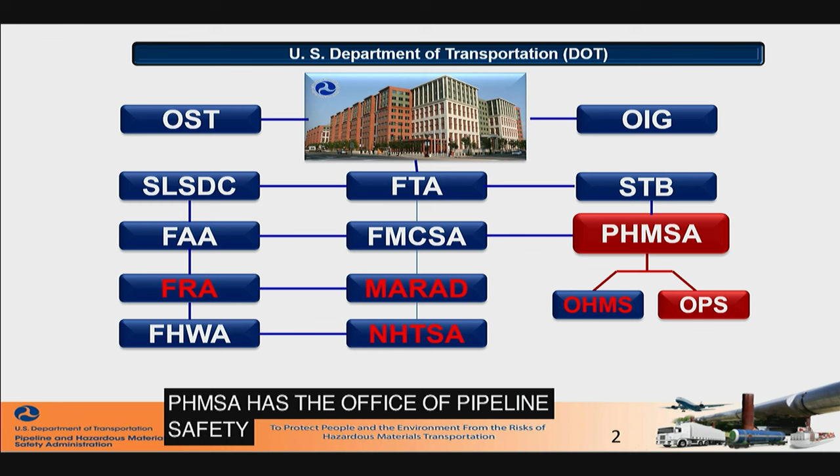PHMSA has two parts. We have the Office of Pipeline Safety, which I represent, and our staff here today represent, and then we also have the Office of Hazardous Materials Safety. Both of us have a connection with LNG, by the way, and we also have discussions and presentations from our Office of Hazardous Materials Safety over the course of this conference.

We have a new and retooled mission and vision statement. It's a modification of our prior mission statement, and also our vision as well. Our mission is to protect people and the environment by advancing the safe transportation of energy and other hazardous materials that are essential to our daily lives.

Our focus, I guess, is on advancing, which means we regulate, we implement policies, we enforce a variety of methods to advance safety. We promote safety. We are a safety organization. That is our focus—pipeline safety, and in this case, liquefied natural gas safety.

I think it's probably fitting to say, related to our vision, that we strive to be the most innovative transportation safety organization in the world. It's really something we target, and certainly with LNG, probably more so than many of the areas we deal with. We're doing a lot of work related to our pipeline regulations, but certainly with LNG, it's in pretty good need of advancing and being more innovative, moving beyond the 20th century more into the 21st century, and dealing with the issue of regulatory lag.

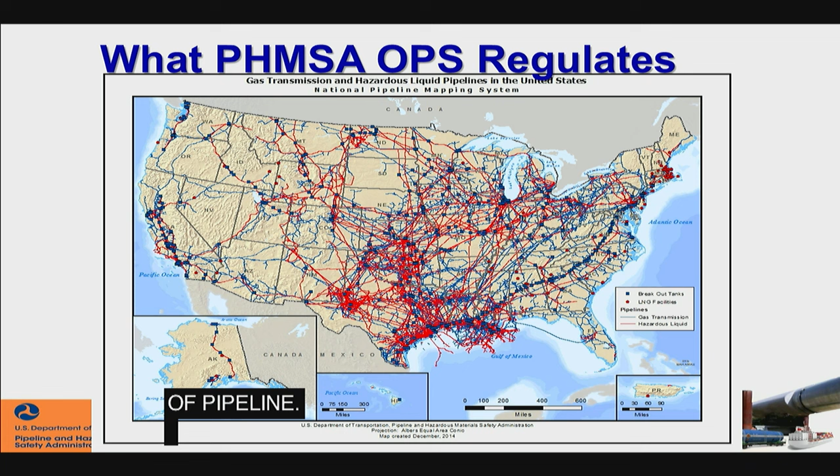An overview of the pipeline system. This only represents transmission and hazardous liquid systems. Liquid is red and transmission is blue. That's about 600,000 miles of the 2.6 million miles. The balance, about 2.1 million, is distribution pipelines.

Some of our responsibilities are kind of plain vanilla for many of you who deal with us day to day, but we do publish three regulations of note. There are others we also have, but Part 192 is well known as our gas pipeline safety regulations, Part 193 is the LNG regulations, and Part 195 is for hazardous liquid. We perform comprehensive inspections against these regulations, and then we monitor and enforce compliance. There are a number of tools at our disposal to do that.

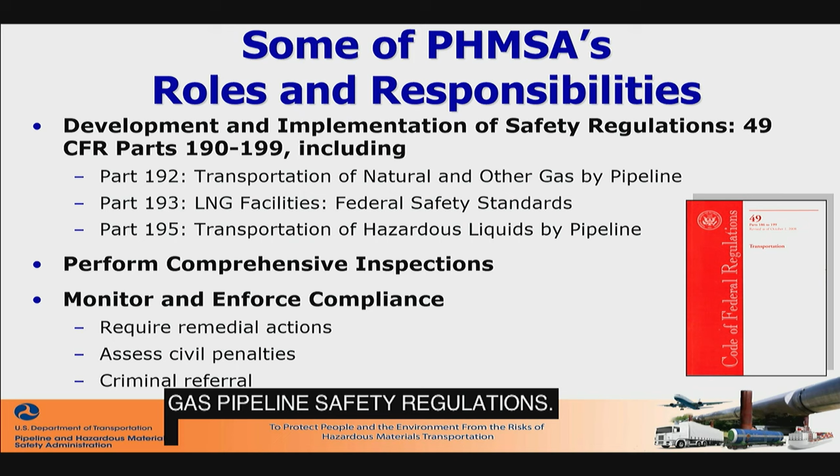We oversee the industry through our regional offices and about 150 and growing inspection staff nationwide that cover all 50 states and Puerto Rico.

Our underlying principle is that it's incumbent upon the operator, whether it's an LNG facility or a pipeline, to know and understand their system and know and understand the risks of operating the systems, the threats involved. We do establish the federal minimum standard for regulations, but we're not satisfied—complying with the regulations won't necessarily ensure safety all the time. In many cases, the operator may need to go beyond the minimum standards, so we strive to affect operator performance beyond the minimum standard. The focus is on performance.

In a nutshell, the operator needs to do what it takes to keep the tiger in the tank, so to speak.

As I was mentioning earlier, our focus here today and why we put these workshops on is to listen, to gather input, and to bring the greatest minds available to bear on technical topics. The focus is highly technical, and we do want to gather input that will help guide us as we move forward.

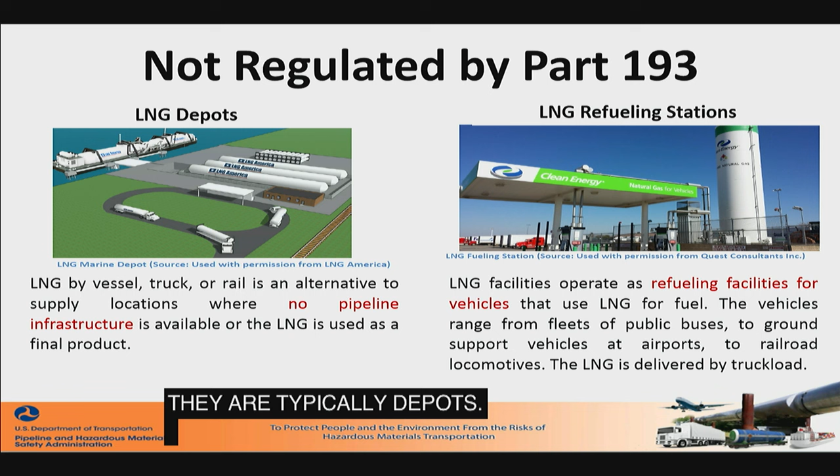Now, there's some facilities that are not regulated by us that handle LNG, and these typically are depots or facilities that receive their LNG by other than a pipeline that's regulated by us. It'd be typically a tanker truck, or it could be by a marine vessel. That's where the connection within our office with the hazardous material safety side of the house comes in, we connect with them who do deal with movement of product over the road for facilities such as the ones illustrated here.

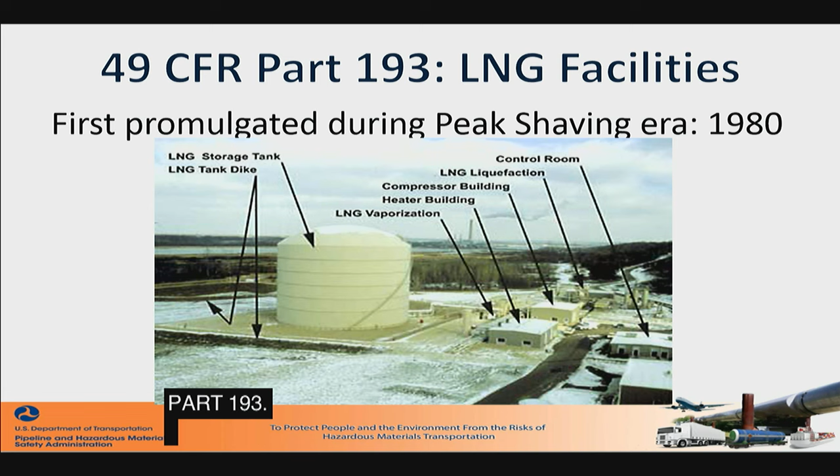As you know, LNG regulations were first promulgated back in 1980 for Part 193, and they typically applied to peak shaving plants where you had a very large tank, very large piece of property, and the various components identified here. We've moved beyond that from peak shaving to just a few years ago.

In fact, when I first came to PHMSA, import was the name of the game, and we were going like gangbusters to deal with import. And oh my, how that has changed in just a few short years. Now we're looking to export.

So we have these facilities that are in service, in the early stages of being in service, and then several proposed for export facilities. And now we're saying, as far as applications for all this vast resource we have of natural gas, small-scale facilities that aren't necessarily regulated by FERC. They're intrastate facilities, and those are on our radar as far as how do we develop regulations to apply to small-scale facilities, especially ones being proposed in industrial parks and the like, whereas the traditional design for an LNG plant involved large pieces of property.

We do coordinate with multiple agencies. Certainly, small-scale LNG presents an opportunity, a challenge for coordination among multiple stakeholders that are out there, and those are listed here. We work closely with the state and local related to the intrastate facilities and provide help and guidance to our state partners.

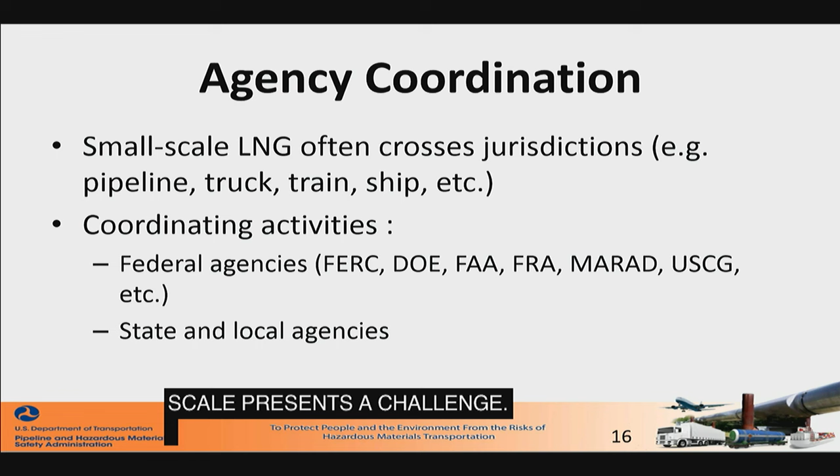As far as our overall plan, we'll flesh this out more over the next couple of days and in the Q&A. We have plans to update Part 193. One of the first steps was holding this meeting over the next two days, then going through the standards incorporated by reference. We need to consider new types of facilities including small scale, new technologies we can bring to bear, and look at incident history. Ultimately we will end up with a notice of proposed rulemaking that will update Part 193.

I would estimate that won't be this year. It could possibly be next year, but we need to take a careful, methodical approach to developing an update to the standard. That's sort of the general plan we have.

I would add that we also have a plan to update the incorporation by reference, the standards that we reference in Part 193, and that will probably be a separate rulemaking before we do the general overhaul of 193.

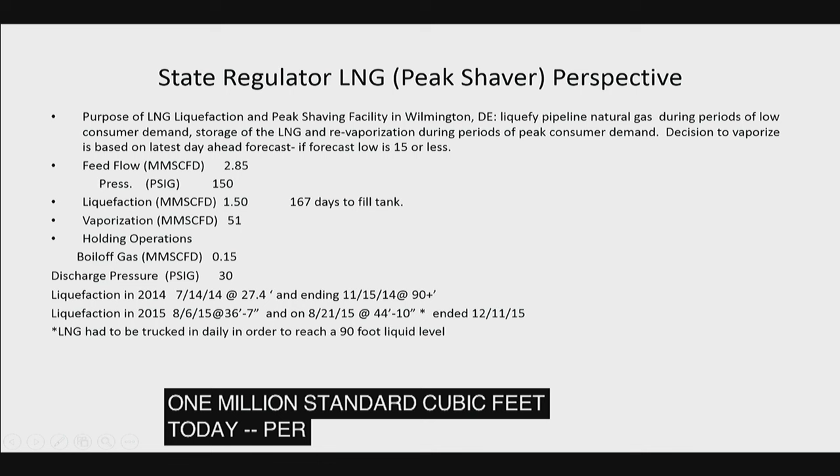Generally, it takes most of the summer to fill the tank. In 2014, in July, it started out at 27 feet, and by the end of the period of liquefaction was up to 90 feet. In 2015, it started out at a tank level of about 36 feet and concluded at the end of the year, December 11th, at about 90 feet in the tank.

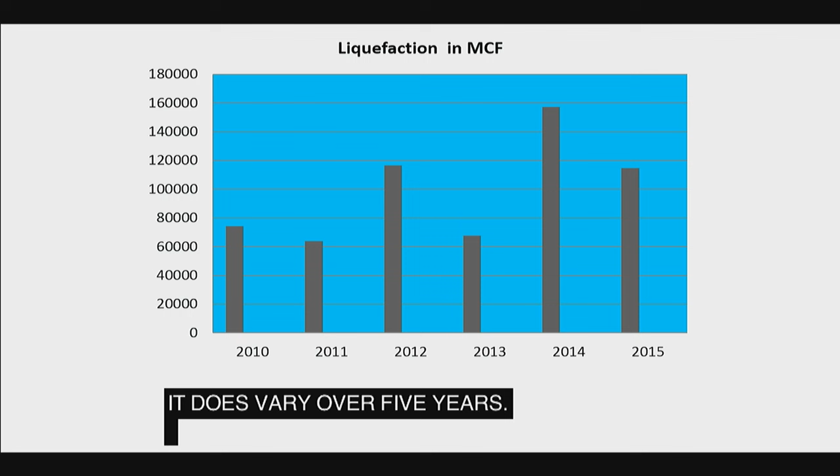The next slide indicates the liquefaction for the past 5 years. As you can see, it does vary over those 5 years, and I would say mostly because of the demand based on the weather in northern Delaware.

The next slide indicates the areas that I emphasize during my inspections as an inspector: inspection of the plant's operating procedures and maintenance plan, inspection of the plant's monthly preventative maintenance schedule to verify that the operator is scheduling the maintenance activities and maintaining a complete record for the plant, component preventative maintenance, inspection completion cards. Basically, a record is maintained for the maintenance items, identifying the component, the date, and type of maintenance activity.

Performed on the component, a liquefied natural gas liquefaction daily log, vaporization log, and daily plant operations checklist. I check all of the data that is recorded by the plant operators to ensure that the readings are normal, consistent, and within the proper operating range.

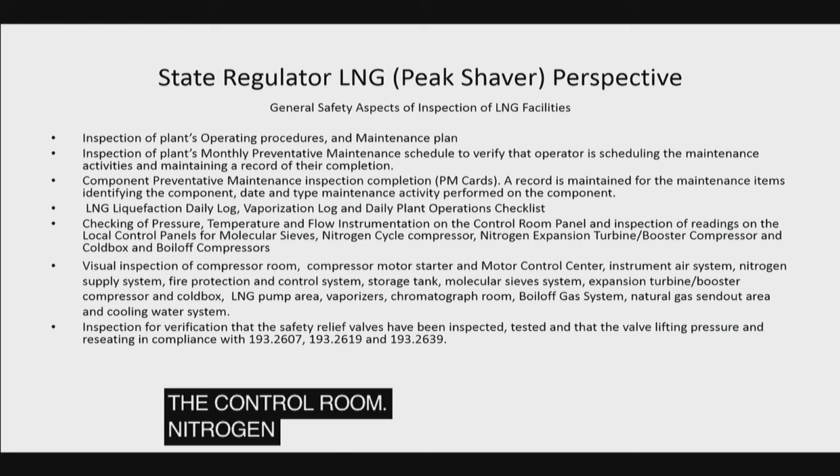Checking of pressure, temperature, flow instrumentation on the control room panel, and inspection of readings on the local control panels for the molecular sieves, nitrogen cycle compressor, which is a closed system, nitrogen expansion turbine, booster compressor, and the cold box and boil-off compressors. Visual inspection of the compressor room, compressor motor starter, and motor control center. Instrument air system, nitrogen supply system, fire protection and control system, and storage tank, molecular sieves, expansion turbine, booster compressor, and cold box.

Other areas include the send-out area and the cooling water system. In particular, I check the safety relief valves to make sure they've been inspected and tested, and that the valve lifting pressure is within the reseating compliance requirements of 193.2607, 193.2619, and 193.2639.

Basically, the liquefaction log lists components, the lines, valves, and instrument number, and a description for which temperatures, pressures, and flows are physically checked and recorded by the plant operators every 2 hours. Most of the time, the operator spends their time in the control room viewing all of the instrumentation.

Moving on to general plant safety prior to and after the startup of liquefaction: records review of the processes, vessels into which natural gas or other hydrocarbons are introduced must be purged with nitrogen to remove any air in the system — molecular sieves, cold box lines to storage — especially if open to the atmosphere. Purging is done by pressurizing with nitrogen and depressurizing through all available purge points until an oxygen content of less than 6% is obtained.

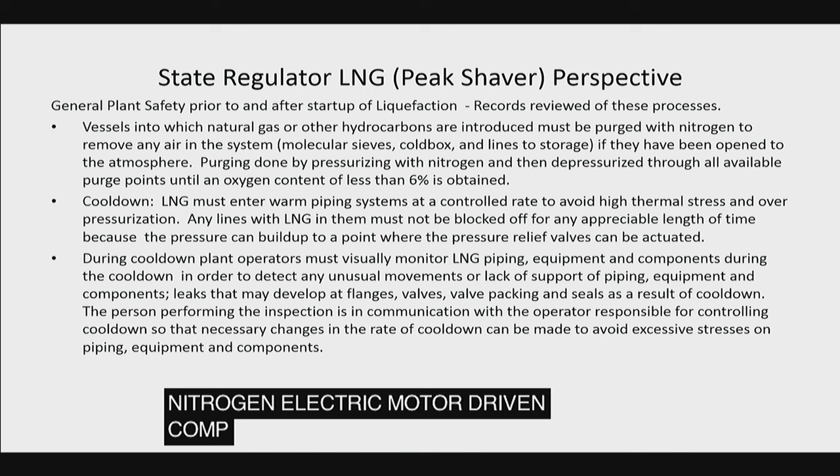Sensitivity adjustments were made to an auto transfer switch between two circuits, with a new switch installed on 12/16/09. The motor starter that drives a two-stage nitrogen electric motor-driven compressor was also replaced. Some equipment issues that had resulted in shutdowns included a broken compressor rotor bar, which was replaced in '09.

An outboard journal bearing replacement was performed that included dipping and baking of the motor stator windings. A thrust bearing collar had loosened, causing electric motor and gear unit vibration and shaking, requiring replacement of the thrust and journal bearings in June of 2010. The compressor had to be removed from the bed plate for a complete overhaul due to problems with seals.

This overhaul was done in March of 2015. There had been a helicoid score on the shaft, so repairs and replacement of worn components were made. That work was done by Houston Dynamics.

Regarding the expansion turbine, here are some of the dates involved with the expansion turbine booster compressor. In August of '13, axial thrust bearing issues were addressed. In July of 2014, the operator prepared to reinstall the turbo expander boost compressor. In March of '15, the expansion turbine and its housing were removed and the turbine sent out so the bearing housing could be drilled and tapped to accept new vibration probes for vibration detection.

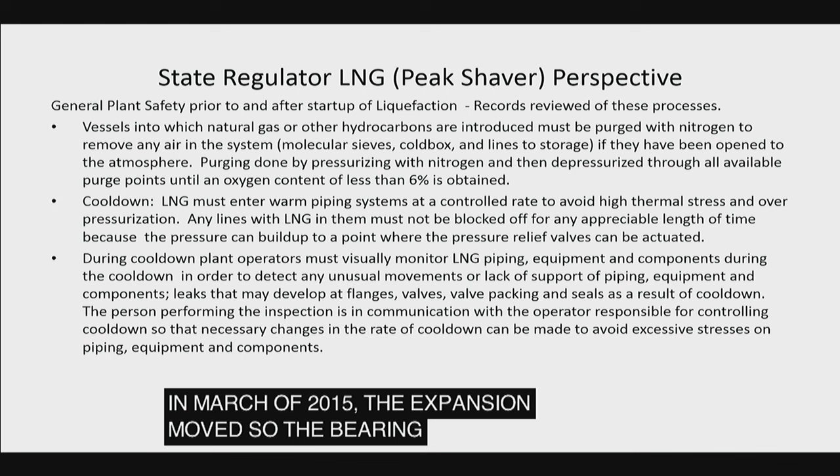The nitrogen expansion turbine needed to be disassembled, with the turbine and compressor wheels removed, and the shaft burnished in the area where the vibration probes view the shaft. In October of '15, a new Fisher booster compressor bypass anti-surge control valve was installed with a positioner, resulting in a 2-week shutdown.

Regarding the molecular sieve system, on various dates: on 5/25/11, there was an upgrade of the molecular sieve system, replacing the pneumatic valve actuators and solenoid valves. In the fourth quarter of 2012, the valves were replaced. Some machining had to be done afterward because of interference fits with some of the valves, and that was completed in July of '14.

As noted, there was a crack in the bottom of the molecular sieve adsorption vessel. The system was down for one week, from 10/24 through 10/30 of 2015.

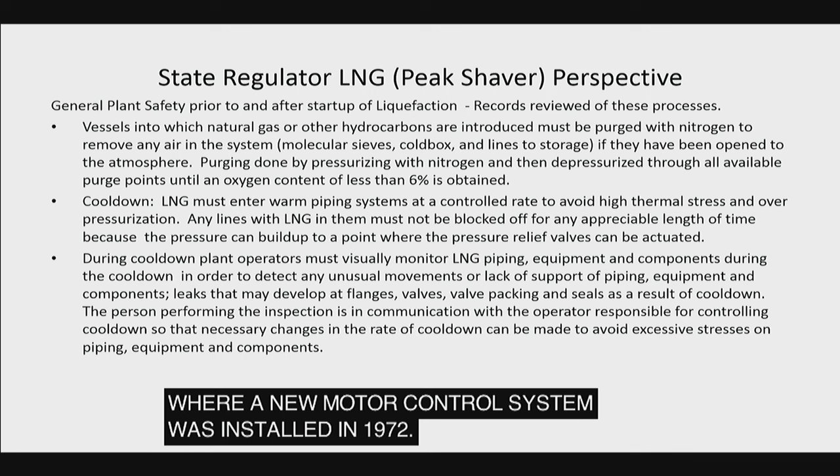Some of the new upgrades to the plant included a new Allen Bradley motor control center, replacing the original installed in 1972, and new local control panels for the molecular sieve system, the nitrogen expansion turbine, booster compressor and cold box, and the boil-off compressors. In addition, new temperature indicating and flow indicating measuring instrumentation replaced older instrumentation in the main control room panel.

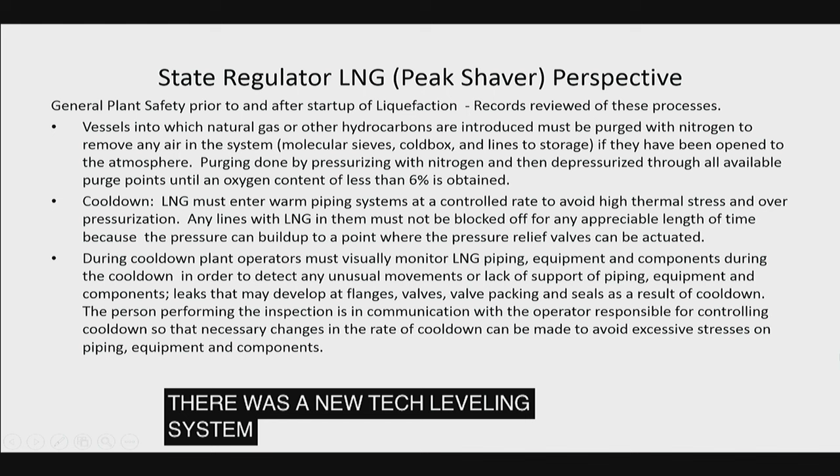They've added a new tank leveling system and Honeywell Enraf system, which can stop every several feet, descend to the bottom of the tank, and determine the density.

Other upgrades included a rebuild and overhaul of the boil-off compressor system to ensure more reliability, with new Dresser Rand controls and feedback sensors to measure temperatures and pressures at key critical compressor system locations. Secondly, the single-cell cooling tower was rebuilt and repaired, including replacing the honeycomb material and water curtain, replacing the cooling tower outer plates, and relocating the motor outside of the airflow stream to increase reliability and reduce corrosion.

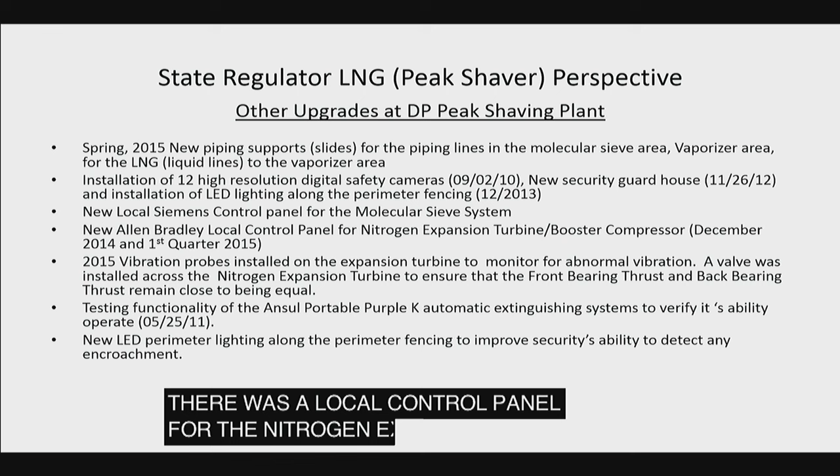Other upgrades to the plant included new piping supports, 12 new high-resolution digital safety cameras in 2010, a new guardhouse in '12, new Siemens control panels for the molecular sieve system, and the Allen Bradley local control panel for the nitrogen expansion turbine booster compressor. They also tested the functionality of the Ansul portable Purple K automatic extinguishing systems and installed new LED perimeter systems.

Original equipment Foxboro pressure control loop, transmitter, controller, positioner on each of two vaporizers was replaced with a Siemens digital controller, electronic pressure transmitter, and digital positioner.

Some remaining electrical issues, reliability due to external power issues has been improved, but the transformer upgrades do not rule out the possibility of electrical momentaries, surges, dips, overcurrent, undervoltage, and phase imbalance or lightning strike issues from a feeder substation which supplies the electric to the LNG facility of Delmarva.

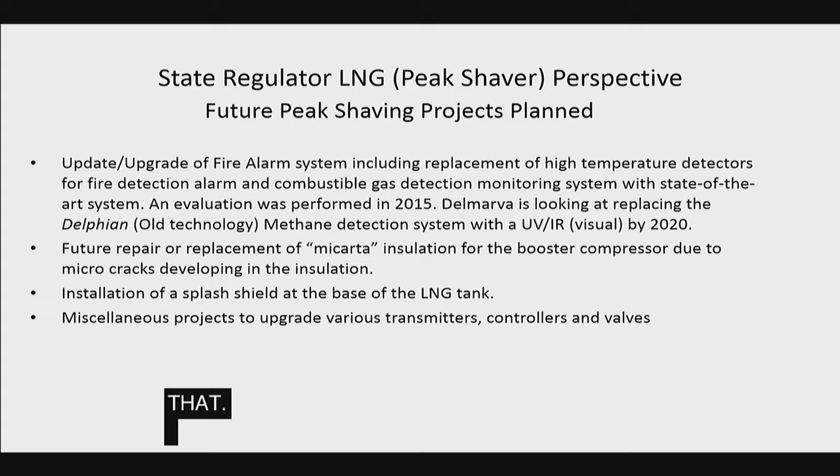They've had some problems with the insulation for the booster compressor, with some micro cracking, and they've got a backup in case of a failure. There's also installation of a splash shield at the base of the LNG tank, and miscellaneous projects to upgrade various transmitters, controllers, and valves. They've been very proactive at making investments in the plant to ensure its safety and reliability.

So they've definitely put a lot of emphasis into keeping the plant, trying to modernize it and also ensure its safety. Thank you. That's my perspective as the pipeline safety engineer in Delaware.

Thank you, Robert. It sounds like you got your hands full. Our next speaker is Jay Jablonski.

Jay Jablonski is Vice President and General Manager of HSB Professional Loss Control, the property group within Hartford Steam Boiler Inspection and Insurance Company. He has been involved with property loss control and fire protection engineering since 1980. He currently manages property loss control services for HSB, involving over 200 site surveys per month, both in the United States and overseas. Jay's experience includes project engineering with an international fire protection contractor where he specialized in the protection of LNG facilities, offshore platforms, and other energy-related facilities. He has been responsible for development of conceptual design philosophies, technical specifications for suppression and detection systems, hazardous analysis, and system application surveys. Jay has been a committee member of NFPA 59A, standard for the production, storage, and handling of liquefied natural gas since 1997, and has been committee chairman since 2006.

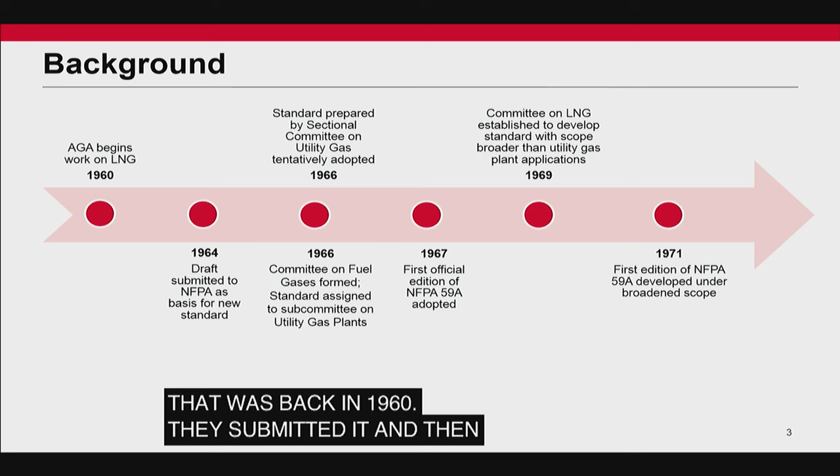As a background, the American Gas Association really started the project to get a standard in place for LNG. That was back in 1960. They put together a draft standard, submitted it to NFPA, and in 1967 the first official NFPA 59A was adopted. At that point, it was really based on protecting peak shavers. Things have changed since then, and we've actually broadened the scope of what we cover.

So what does 59A cover? It applies to facilities that liquefy natural gas. They handle it, they move it, they store it. They have training for people that run these places.

There's also a number of things it doesn't apply to. One you may see if you're in the industry is frozen ground containers - we don't cover that as part of our standard. We also don't cover portable storage, and probably one of the bigger things with what's going on in industry right now is vehicular LNG, whether it's automobiles, trucks, trains, or ships - that's not part of our standard.

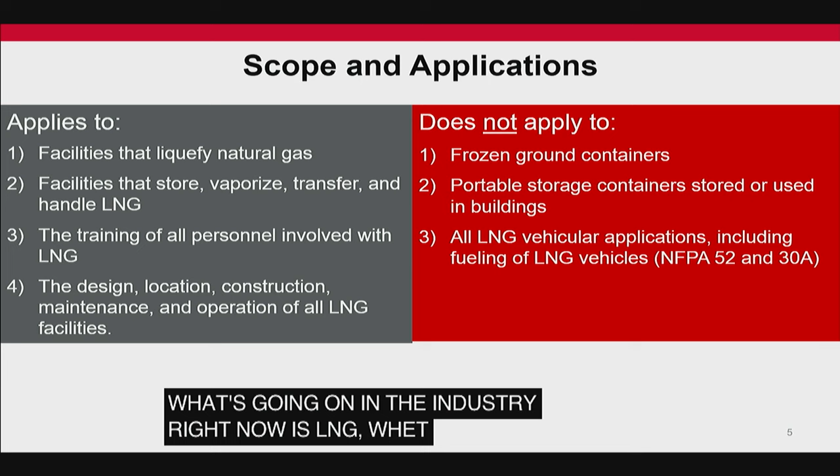Yeah, I know. Little feedback there.

So a lot of those folks are probably represented here in the audience today. We also have a balance rule in place so that you can't have one group basically run the committee. No more than 1/3 of our members can be from any one of those 9 groups.

There's also requirements for a consensus. So if we've got rules that are being changed, we require 2/3.

Oh, no, come on up. You got to talk directly into it. Okay, how's that? It was too far away. Huh? I thought it was too close.

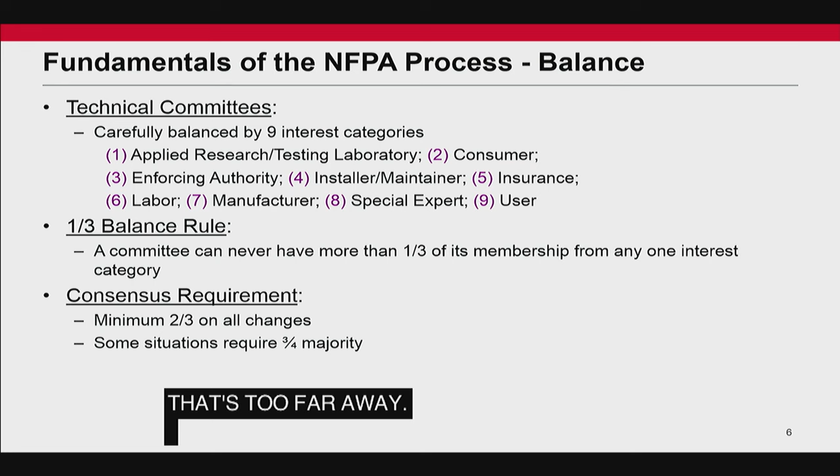So we've got a 2/3 requirement on changes in the rules. So again, we don't want one single group to dominate a committee.

Our current makeup is, as you see on the list, predominantly special experts. We've got 30% or 9, followed by users at 8. So those are our 2 biggest groups.

Ken had his PHMSA folks raise their hands. I think we've got a lot of NFPA 59A committee members here today, and if you could raise your hands just to show the audience our participation - so as you see, we could probably have a committee meeting, we've got enough members here today. But again, we look for people who are experts in the industry, who want to be involved and can bring some expertise to our group.

We also have alternates on the committee who, if the principal member can't attend or is unable to vote, we have alternates to do that. So about half of our principal members have alternate members that support us also, and they might bring some special expertise to the group.

So I want to go quickly over the changes since 2001, because that was the edition that was adopted by Part 193, and I'm going to hit it at a high level. If you went through and looked at all the changes, we could be here for 2 days. I've got a document of 190 something pages long to do a comparison between those 2 editions. So there's a significant amount of changes.

So we've reorganized the chapters. There's been changes to reference publications. There's been a lot of changes with tanks in terms of what was covered, what wasn't covered. I'll go into each one separately.

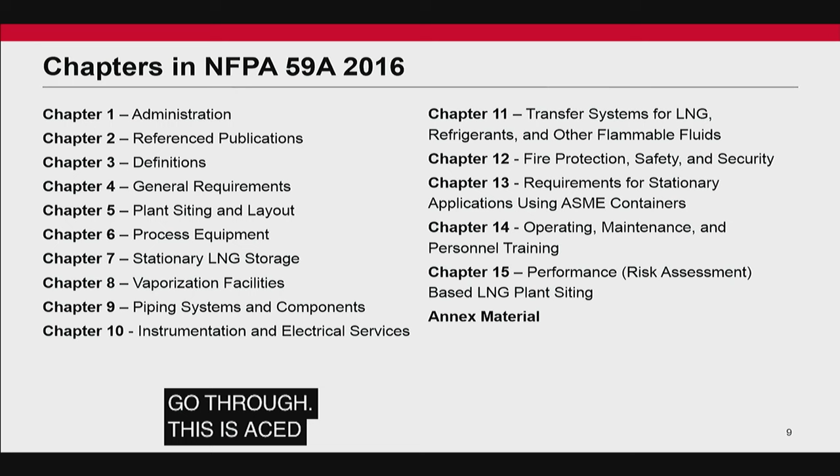The rest I'll quickly go through. B is for seismic design. C is for security, which is based on the 49 CFR 193 subpart J, Appendix J - we've actually incorporated that in there. We've got a section on training, D, and then there's informational references, Annex E.

So chapter 2. Again, I'm just going to hit some of the highlights and not hit every chapter.

This is the reference documents, the documents that, as part of the standard, are incorporated by reference. We go through this every cycle, about a 3-year period, and decide which standards, and which version of the standard, are going to be referenced. One good example: in the 2001 edition, we referenced the 1992 Boiler Pressure Vessel Code. In the current edition, the 2016, we adopted the 2013 Pressure Vessel Code. The standards we adopt have changed quite a bit over the years, and we try to stay current. It's a big project as a committee, but something we feel is necessary.

So we typically have a task group that goes through the list and says, here's where we are on the current standard, what's changed, what are the new standards, and does it make sense to adopt whatever the next version is.

One of the changes is in the definition section, Chapter 3. We defined a component, a facility, and a plant. There's been confusion over the years in the use of facility and plant, so we tried to define it better: a component is a piece of equipment within a facility; a facility is something that actually handles and makes the LNG, vaporizes, stores it, whatever; and a plant could be multiple facilities within one location functioning as a unit. Again, trying to standardize this so it's understandable to industry.

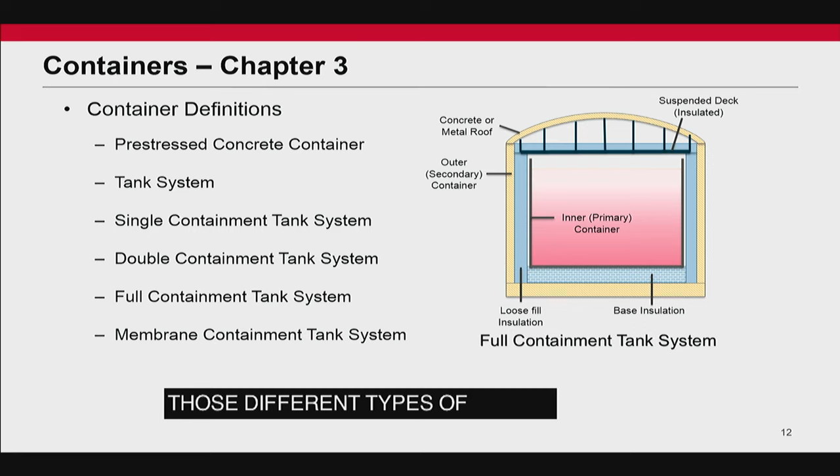Probably one of the bigger changes, until I get to the end, is plant siting and layout, Chapter 5. This is near and dear to most of the folks involved in the LNG industry. We've had a lot of changes in terms of siting of equipment and facilities, distances to property lines, and distances to different occupancies.

We added a model evaluation protocol for vapor dispersion. The 2001 edition specified a very specific method to use for vapor dispersion analysis. Now we have an evaluation protocol that allows other software and methods to be used instead of just that one specific one. We've also added differences in spacing, on thermal spacing, allowing some credit for active and passive systems. Again, a big change.

The siting criteria from a spill design has changed over the years, mainly based on the type of tankage that's in place. So big changes there.

We've also gone to a number of different classifications for buildings in terms of seismic, wind, ice, and snow. We've classified them as A, B, C, and you can look it up in the standard. I'm not going to go through the details, but again, changes on how you design these buildings.

We've put in some additional requirements for portable LNG, which really wasn't much addressed back in 2001. And now there's more emphasis on concrete design, so we've added a reference to the American Concrete Institute.

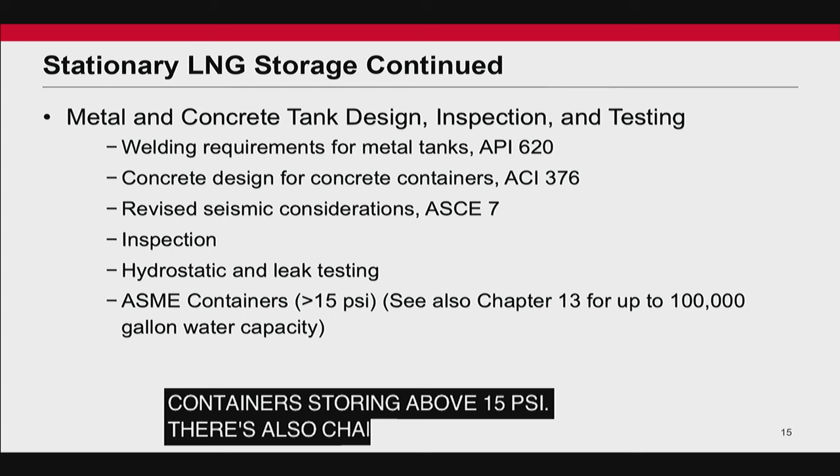Piping system and components, which is now Chapter 9. Same thing, we talked about what the requirements are for piping.

There's a definition of process piping, which sometimes brings up an issue with what is piping within a facility. We reference ASME B31.3 process piping, and that is for piping that is not part of the LNG container. There's a separate requirement for piping that's part of that container. So again, some changes there.

We define the materials of construction for the piping, what the requirements are in terms of suitability for its use, whether it's for cryogenic LNG process or whether it's for, say, ambient temperature type processing. So again, we look at those requirements, decide what standards need to be followed, and typically adopt those standards and maybe add additional requirements beyond it.

We've got inspection testing requirements for the piping systems. And then we also addressed, which is again relatively new, the cryogenic pipe-in-a-pipe systems. I know one of my speakers following will talk a little bit more about that, so I just wanted to at least throw that out there, that again, this is something that's been changed since that edition.

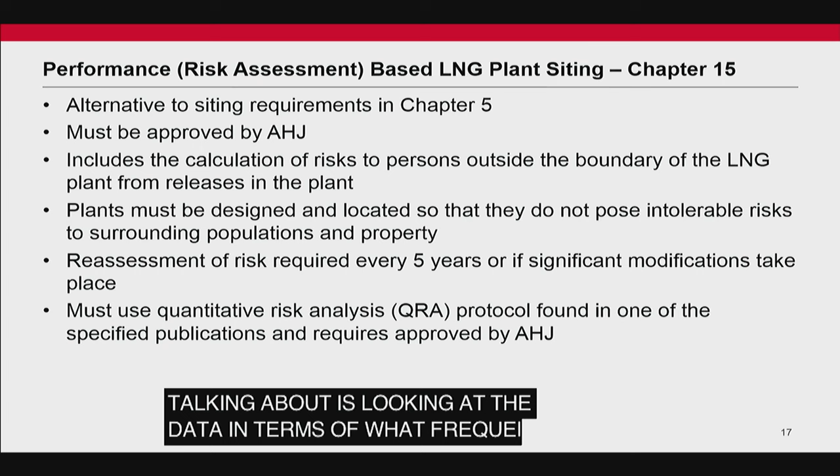I know one of the things we talk about is looking at the data in terms of what frequency should we use for failures. There's information out there, and there's new information being generated, and as a committee we always look at that and say, are there things we can do to improve, make it better, add additional information, make for, again, a safer facility.

Next, I want to touch on PHMSA's adoption of the newer editions. And again, this is from my perspective, not from PHMSA's. We'll hear a little bit more about that later on.

But the plan is to review the current edition of NFPA 59A. They have really three options. They can adopt it in its entirety. They can adopt certain sections of it, kind of a cafeteria style, I guess is the way to put it. Maybe they feel Chapter 5 is appropriate and Chapter 15 is not. Again, that's the decision they have to make. Or they don't adopt it at all. They leave it as currently 193 adopts the 2001 edition.

So ideally, the goal would be to get to the point for the next edition, which is the 2019 edition, that there's agreement between the committee, the users, all the participants, that the 2019 edition could be adopted in its entirety. Again, it takes time to adopt a standard. It takes time to change rules and regulations within the federal government. But I think we're making some good steps forward, some good discussions. We've had a couple meetings where we've talked about some of the points that I'm going to bring up next.

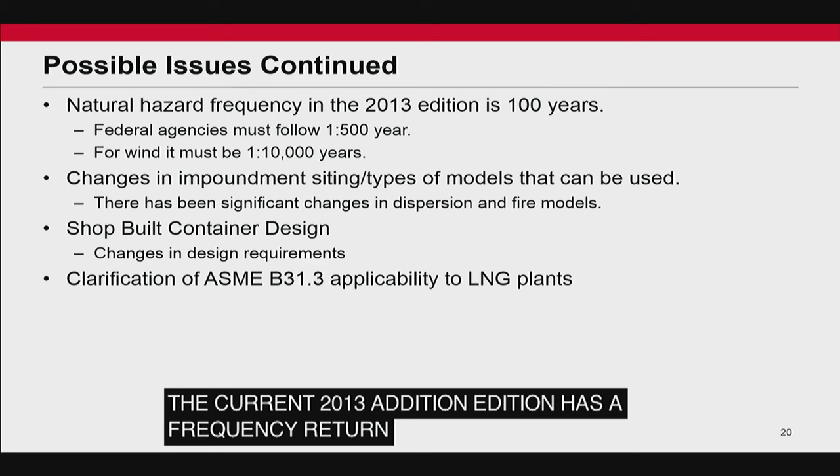Another issue is the natural hazard frequency. The current 2013 edition used a 100-year natural hazard frequency return period. The federal agencies have different requirements for that. So there's a bit of a disconnect between what we're looking at and what they're looking at, and that needs to be addressed.

Impoundment and siting types—there's a number of models that can be used for siting of impoundments, whether from gas dispersion or thermal. There has to be some consistency. We have our requirements, PHMSA might have slightly different requirements. So again, it's making sure we're using the appropriate models that give us the best results, best answers, to give us a good facility.

There's been some changes in shop built container design requirements. I touched on it briefly with the boiler pressure vessel requirements. Those things have changed over the years, and there needs to be some agreement on which way we go forward.

On process piping—and I'm not the process piping guy, I've got an expert in the back who is—there are questions on how ASME B31.3 is applicable to an LNG plant. So the decision has to be made: does it apply, doesn't it apply, what are its limits from one point to the other, does it start here, does it end here? Again, it's just a matter of getting into agreement.

A couple more points. One of the things we did is move some of the other hazards from the body of the standard to an annex item. From PHMSA's standpoint, their concern was that if we move other hazards from the body of the standard, would that mean a user or builder would not have to apply that requirement because it's now just an annex reference? So that would have to be addressed.

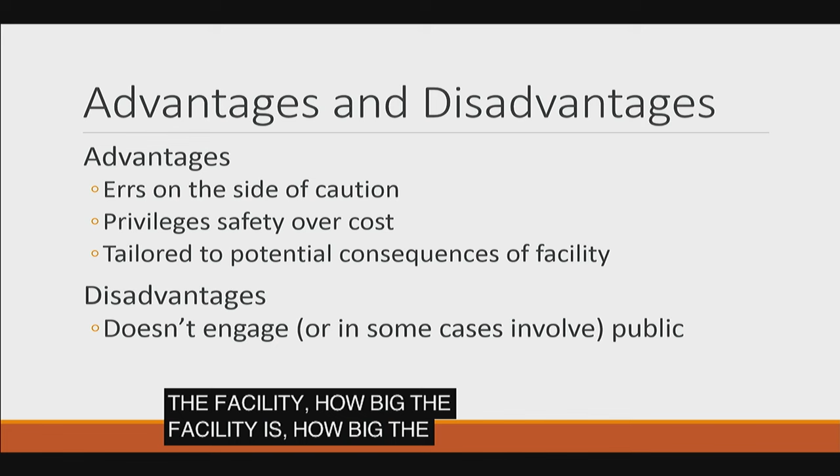From my perspective, there are a number of advantages to this regulatory design, and a disadvantage. The regulatory design errs on the side of caution — I think that's what it's supposed to do. It privileges safety over cost, and it's tailored to the potential consequences of the facility, by how big the facility is, how big the pipes are. That is a measure of risk, ultimately, about a particular facility, so small versus large does get factored in here. It's just that overall it's a very precautionary scheme. The disadvantage, I'd say, is that it doesn't really engage the public, or in some cases involve the public at all, in these risk decisions.

All right, what about risk-based siting? Here, the basis for siting is probabilistic risk assessment, quantitative risk analysis based on protocols. This is a risk-based approach that protects against intolerable risks to surrounding populations, installations, or property, taking the language from 59A. Intolerable comes, as I understand it, from the British scheme, and it was new to me.

I've seen the words acceptable and unacceptable before, but not intolerable — but it's a good word. This is based on quantitative risk analysis, and it sets limits both on individual risk based on land use, and societal risk limits based on probability and number of fatalities. Getting back to this question of catastrophic risk: very low probability, say 1 in a billion, risk of a catastrophic event with thousands of deaths — that's tolerable under the particular scheme. While relatively high probability, say 1 in 1,000, risk of a few deaths is considered intolerable. To me, that precisely gets at the point of how risk-based is different than the current approach.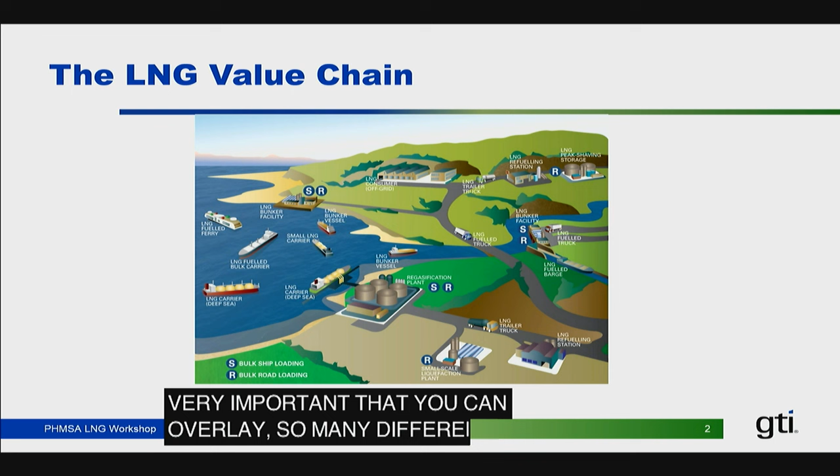Part of my presentation today is going to talk about training first responders. But if you look at this slide that talks about the LNG value chain, it's very important to overlay that there are so many different stakeholders in the LNG value chain, not just first responders. There's Port Authority, there's Coast Guard, there's state regulators. One of the things we learned in Jacksonville is that if you put the word out that you were putting together LNG training, it's very important that you need to include so many other people that we didn't realize wanted to be included, like people from the local hospitals. So I'm going to talk a little bit about the first responder experience, but mostly I'm going to touch upon training all stakeholders, and that also involves creating consistent regulations.

And the segue for me for this organization is for PHMSA to understand by updating 193, hopefully it's a wake-up call to other organizations that small-scale LNG is happening in this country. The big-scale project, Cheniere's project, is fantastic, but as the monetization changes in the LNG value chain, you're going to have smaller-scale projects.

Again, move to small-scale LNG. The numbers for 2015, as anyone in this room knows, the natural gas business is somewhat slow. But despite that, you do have quite a bit of small-scale construction happening. So that's what we're seeing, a trend in small-scale LNG. I think if we had a buzzer for every time you heard the words small-scale LNG today, it'd be going off left and right. So we are moving to small-scale LNG, and one of the things we need to understand is that these are greenfield projects, and you're going to have to include everyone, including your first responders.

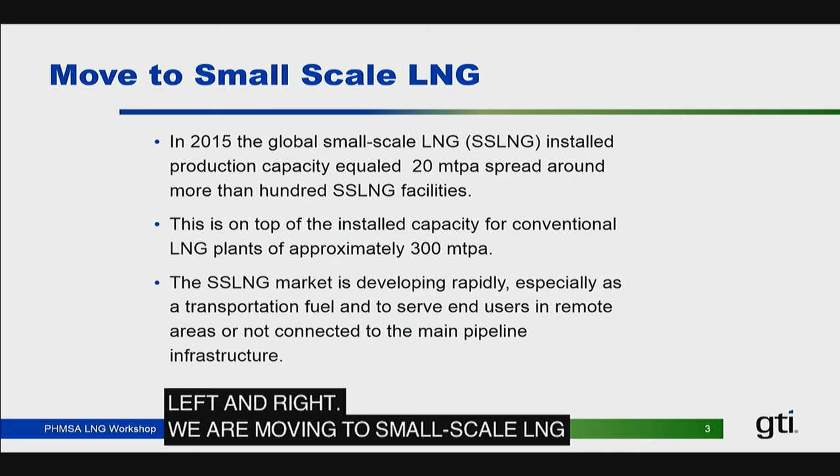And that's what we learned in our experiment in Jacksonville. What went very well, but again, we found there were more stakeholders than just the first responders who wanted to learn about LNG and LNG awareness.

Small-scale LNG applications, we talked about it. They talked about it in the earlier panel. I won't go through it. You can decide, and I guess the next two slides that I have talk about the fact that small scale is all over the place. There are websites dedicated purely to small-scale LNG vessels.

And in that realm, that snapshot is good enough for some players. But I just showed you in the LNG value chain for small-scale LNG, it's so much more. In my world, it was Harvey Gulf. It was training Harvey Gulf. It was training Tote. It was training, working with Florida East Coast Railway. So the spectrum is very wide, and the regulations just need to catch up.

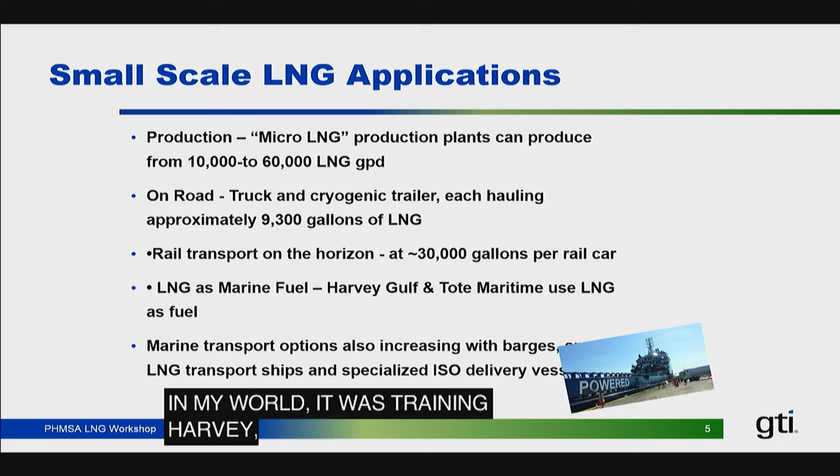Again, this is kind of what I talked about - you really see the varying size. That's a slide our marketing people put together so you understand there are two different applications: small LNG carriers and LNG carriers, and the actual application which really applies to PHMSA, which is the smaller scale bunkering and peak shaving.

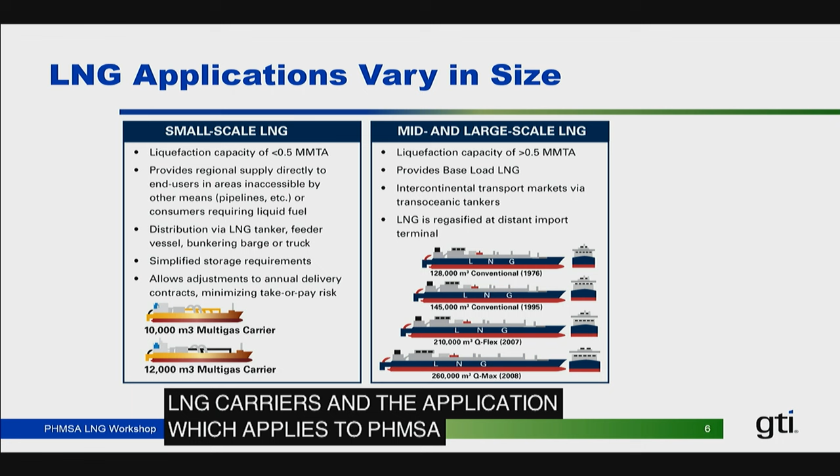GTT is going to talk about their great work with their barge. This is happening, and one of the things we're running into is that you need to train all the stakeholders, and there's just not enough resources out there to train people. It's hard to do training in a slow industry - everyone knows that.

And again, GTT is going to talk about the bunkering barge being developed. But that's more than just your first responders - those guys from AGL are trained privately by AGL. There are so many different pieces of the puzzle, and that's just an LNG fueled vessel, a tote vessel being fueled in Jacksonville, Florida, and that doesn't even include a bunkering facility or a bunkering barge.

Again, everybody needs to be trained, and we learned that quickly as we put the word out in Jacksonville, Florida that this training was going on. It was underwritten by quite a few companies like Tote and AGL, and the draw was that it was free. That can't happen all along - we need to understand there needs to be investment in training these stakeholders.

Okay, how? Like I said, my background is maritime, so I've been very involved. Well, the Coast Guard has done it - that side of the manifold has developed guidance. It's not a regulation, it's policy letters, but those policy letters were not developed in a vacuum. They were developed through the Federal Register. People had plenty of time to comment on them, and they came out last year.

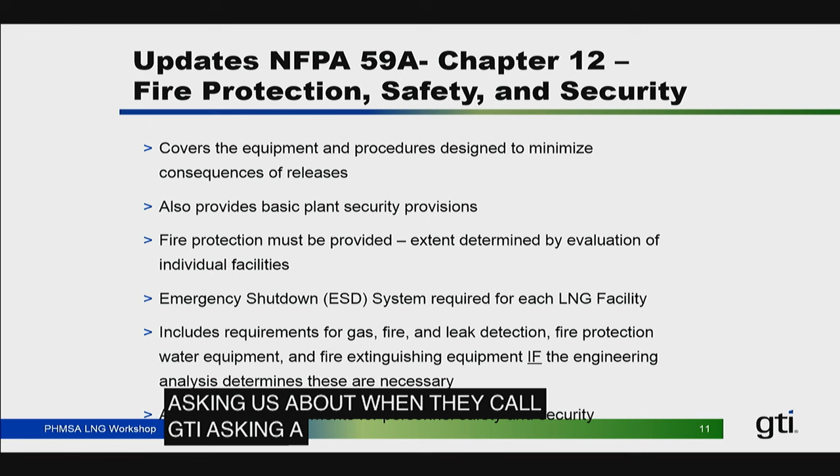As you build out this infrastructure for small-scale LNG, these are all greenfield applications - you're not going to have that many brownfields. This is breaking ground, so it's important to understand you may or may not have an LNG-trained first responder in your area. When I say first responder, that could include your emergency room - do you have a cryogenic burn area within your ER or local hospital? There are so many pieces of the puzzle that, as we worked with Tote and various people in Jacksonville, as small scale spreads you're going to need to understand who the players are. That's kind of the one takeaway from this, besides my horrible orange jacket.

I do apologize - my son is graduating from the University of Virginia this weekend, and I had to rep the school, so I apologize for that.

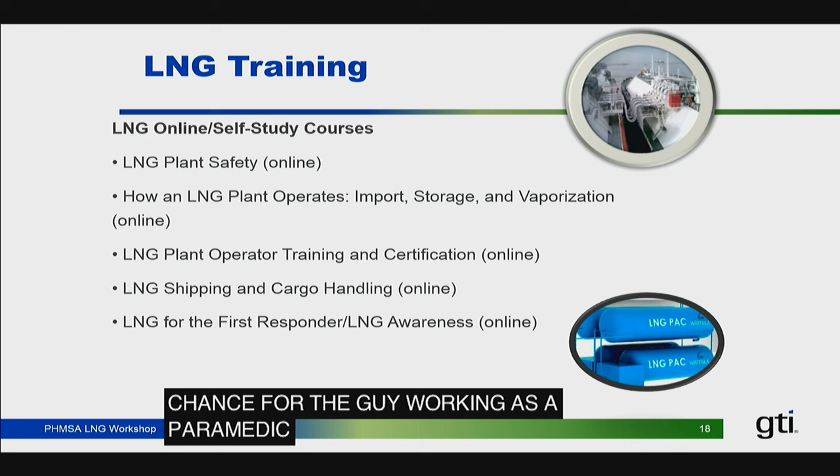So that's kind of what we offer online. And by the end of the month, you will be able to take a first responder course addressed for the guy working as a paramedic or as a fireman. One of the things we've found is they are very interested in that, so we've been talking to a number of states about it.

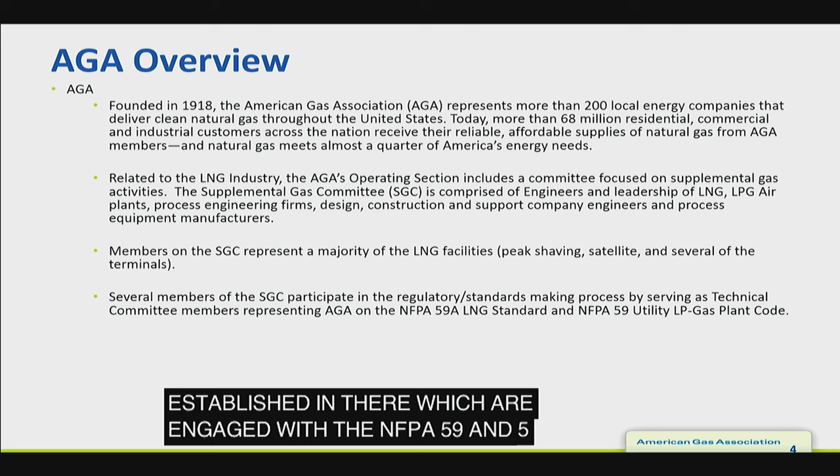With respect to the LNG business, AGA's Supplemental Gas Committee, and a number of our members are here today. Nice to see some friendly faces in the audience. Our committee is very active in the LNG industry. We have standards task forces established that are very engaged in the NFPA 59 and 59A process. There are members of the SGC who serve on that technical committee - myself, Mr. Brightwell, Mr. Wenzel - so there's a number of those here.

With respect to BG&E, as mentioned, I've been with BG 39 years and very proud of that time I've been able to spend with them. But we've reached a milestone even beyond my 39 years - we're the oldest gas utility in the nation. We're celebrating 200 years in the industry that began all the way back in 1816 with Rembrandt Peale. So we're very, very proud of that accomplishment. A couple statistics here: we have 800 square miles of gas service territory, 650,000 customers, approximately 3,200 employees, covering the gas and electric portions of our business. We also manage over 7,100 miles of pipeline, a pretty significant effort, and we're real proud and plan to continue that long history.

Before moving on to the main body of the presentation, I thought it would be appropriate to do a brief overview of LNG and why we're calling some of these managing older facilities - we had to go back in history slightly. The LNG industry isn't new; it's not a new technology by any means, but in the mid-1960s it really surged.

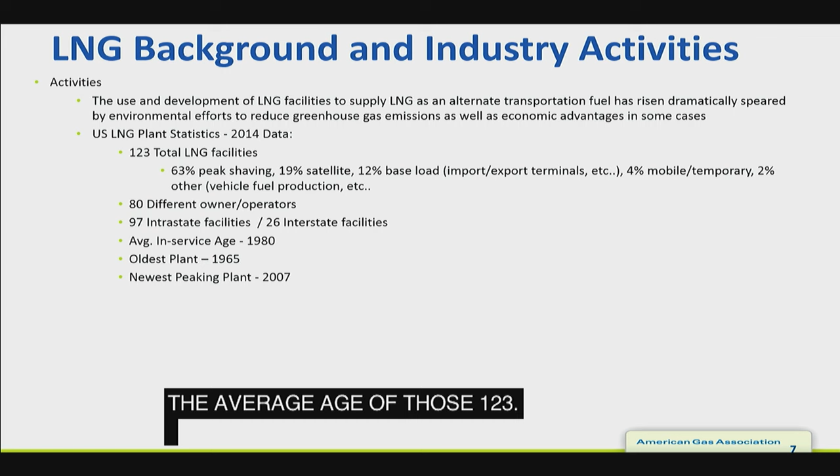Also, as mentioned, all the jurisdictional LNG facilities are required by the regulations to comply with reporting requirements in Part 191, drug and alcohol testing in Part 199, and the Part 193 LNG safety requirements.

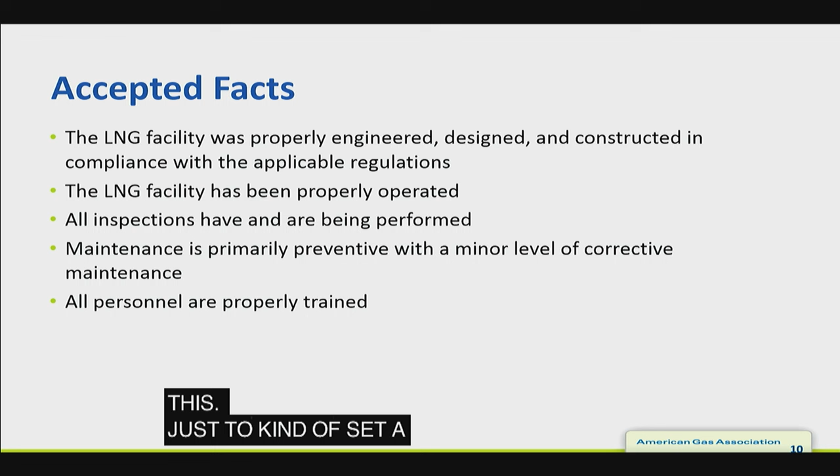To set a baseline, we have to find common ground and accept some facts or a starting place, because facts can sometimes be debated. But I would say that the LNG facilities in service have been properly engineered, designed, and constructed in compliance with the regulations. They've been inspected and cited throughout. They've been properly operated, inspections have all been performed, and primarily preventative maintenance is being conducted, which demonstrates that we're not seeing a high failure rate or downtime of the facilities, and that all personnel are properly trained.

Part of managing an older facility, or any facility for that matter—I didn't cover the title of this, but it really is managing beyond the regulations, and the challenges, which is part of the title of this presentation. Part of that is appropriately managing the facility through its phases outside of what the regulations call for. Aging assets, process equipment, and components, if not managed properly, can lead to decreased reliability, efficiency, and increased energy consumption. So there's a lot of factors that weigh in. Ultimately, it's the safety of the facility we're trying to manage first, but there are other requirements and expectations as well.

Addressing aging requires maintaining existing equipment operationally while performing all the mandatory prescriptive requirements that are there. It also has to identify techniques to extend the equipment life. There are also long-term plans for replacement of components. This is where the successes can come in, because these typically aren't shelf items in our facilities, and to keep the facility safe, modern, serviceable, and reliable, we have to keep up with upgrades throughout its life cycle.

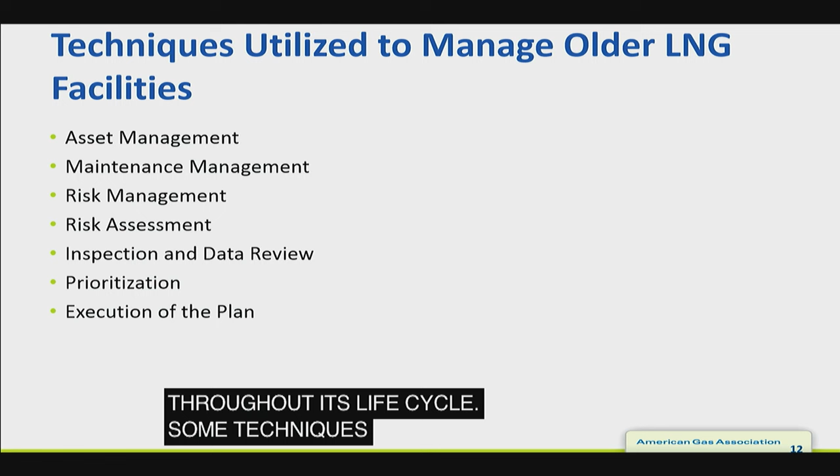Some techniques used to manage older facilities involve asset management. Maintenance management—we have to deal with that now as part of the regulations, demonstrating that we're doing appropriate levels of maintenance. There's also the risk management aspects, the risk assessments we might perform, the inspection and data review, the prioritization, the development of plans to modernize your facility, and then actual execution of the plan.

But there are other standards out there that can be leveraged to develop a thorough asset management process, like the ISO 55000 standard, which replaced the old PAS 55, which some may be familiar with. I'll also mention the API RP 1173. While that's principally aimed at the pipeline side of the energy business, there are opportunities to leverage that recommended practice, which gets into management's practice and support in understanding, managing, and funding operations and upgrades to keep facilities modern. I think there's an opportunity there that many companies are interested in leveraging.

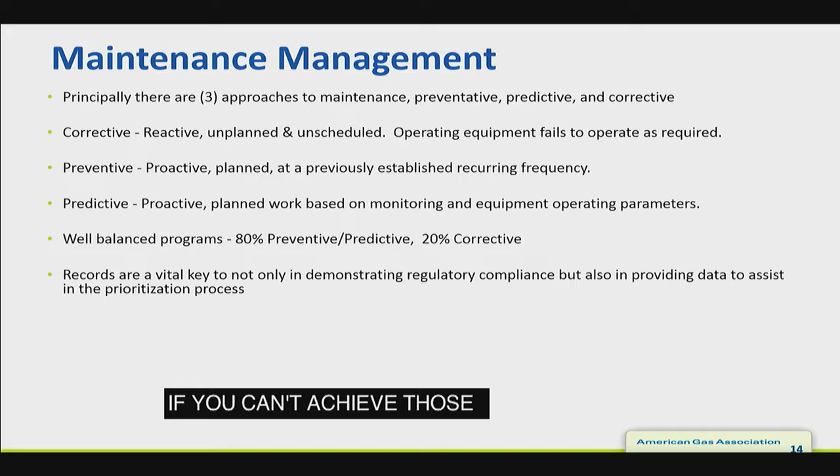With respect to maintenance management, at a high level there are basically three approaches: preventative, predictive, and corrective. Each can be more efficient or appropriate than the other. Certainly corrective is more reactive, and we'd all agree we want to avoid those situations as best we can through effective preventative and predictive maintenance. I don't want to call it an industry standard, but a good goal is about 80% preventative and predictive, and about 20% corrective. If you can't achieve those values, you should look at your preventative and predictive actions to see if they can be adjusted to get back to a more appropriate ratio.

Records, whether for regulatory requirements or decision making in updating facilities, are vital. If you don't have the record, you don't have the history. You might not only be out of compliance with mandatory record-keeping requirements, but you might not have all the factors involved in making a decision to replace or perform major repair on a piece of equipment.

Risk management has been talked about a number of times today. It's a combination of probability and severity of an event. Risk management is the identification, assessment, and prioritization of those risks. The regulations were originally conceptually developed to address those risks, and I think they do so pretty well, but there's always room for improvement as we move forward through lessons learned.

There are other risks too, and that's perceptions, as we spoke of earlier, the perceptions of the public and how they think we're adequately and appropriately addressing safety and maintaining and operating our facilities.

Risk isn't constant, it changes with time. There's constant reevaluation of risks that goes on when you're managing a plant effectively. The preparation and execution of an action plan to address current and potential future risk is essential.

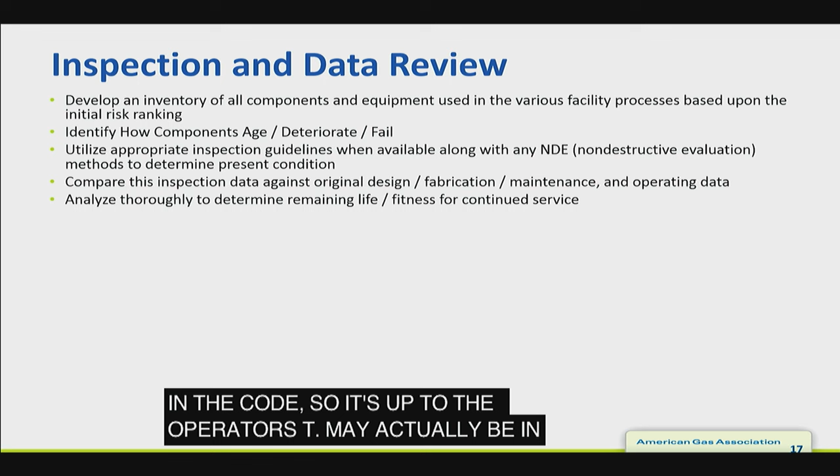Inspection of data and data review, developing an inventory of all components and equipment used in the various facilities, identifying how components age, deteriorate, and fail, and utilizing appropriate inspection guidelines. A lot of these inspection guidelines aren't talked about in the code, so it's up to the operators. It may actually be in later editions of 59A in the annex, because some of these inspections aren't necessarily regulatory. As Jay Jablonski, the chair of 59A, mentioned, we've advanced that by referencing some standards out there that help operators develop processes, procedures, and plans to perform appropriate inspections to help manage the facilities.

You need to compare the data. What was it originally? How has it changed over the years? And then analyze thoroughly to determine what the remaining life in that equipment might be.

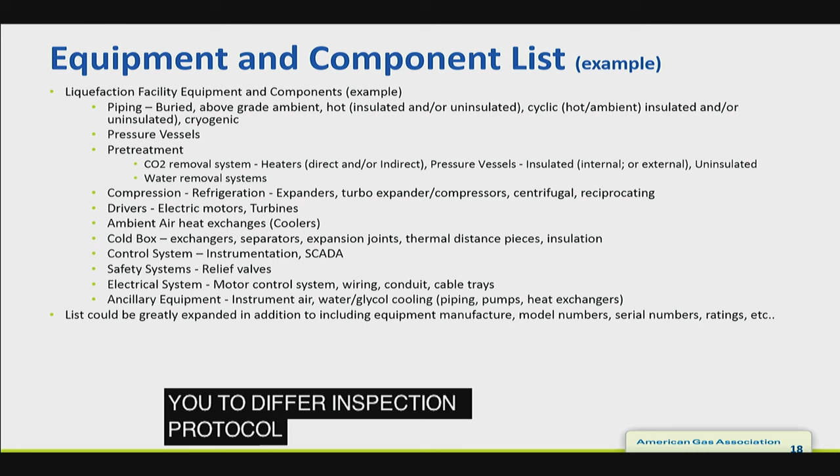And addressing corrosion control. There's a number of pressure vessels involved in these systems, the pretreatment systems, the compression. There was a lot of talk from one of the inspectors about all the compression that was at one of the facilities. All these are long lead time items: the drivers, the motors and engines for this equipment, heat exchangers, cold boxes where the actual phase change takes place. Some of these are 16 months to 2 years out for replacement, so you really need to closely monitor that. And it goes on with safety systems, electrical systems, and ancillary equipment.

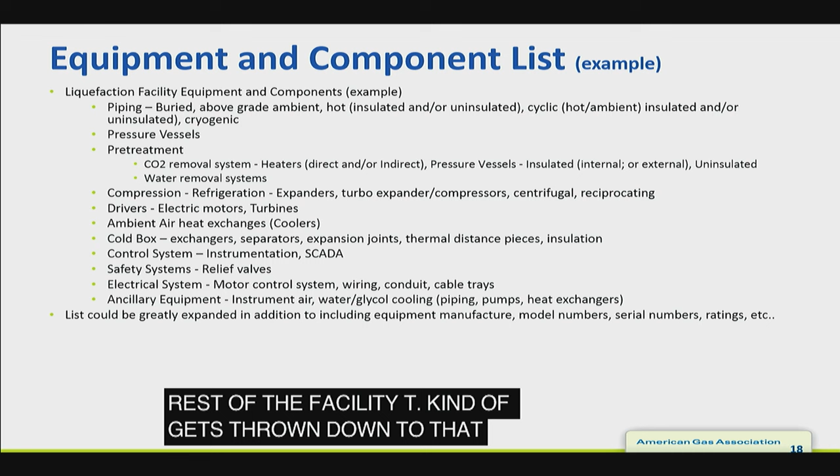I'll say that's just as important as the rest of the facility. It kind of gets thrown into that small bucket of ancillary, but the plant doesn't run without a good air system, cooling systems, and so forth. So it's all essential equipment.

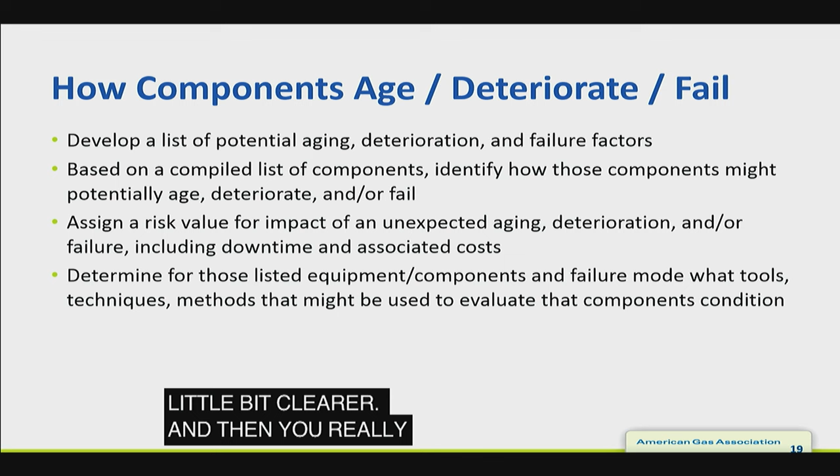How components age and deteriorate—this is kind of the overview, I'll drill down a little bit in further slides. We'll develop a list of potential aging, deterioration, and failure factors, and we'll assign a risk value to that. This is the subjective risk value that an operator might develop, and I'll walk us through some of that to make it a little bit clearer. Then you really have to determine what tools might be used on that equipment to determine its condition.

This is by all means not an all-inclusive list, but certainly corrosion is a high priority in managing facilities, and corrosion rates are different at different facilities, based on where they're sited.

There's also fatigue, which is more related, in many cases, to mechanical equipment as it's operating. It may be overloaded, or it just may be fatigued beyond its expectations. So you have to be monitoring that, and there are ways to manage that.

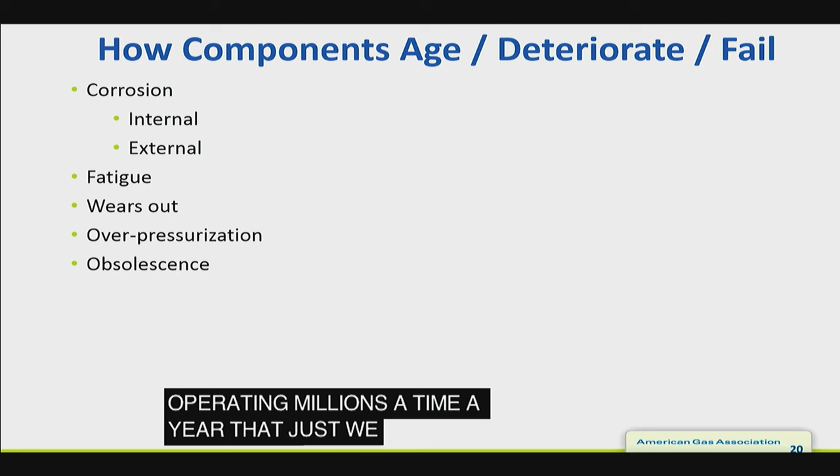Things wear out. There's soft goods, there's valve components that are operating millions of times a year that just wear, and that's all mainly covered through normal maintenance that's more or less required by the mandatory regulatory requirements.

Overpressurizations—are we managing that? Certainly that places stresses upon the equipment and vessels that we don't want to exceed, and managing that is good safety relief valves, good operating procedures, and safeguards in your control systems to prevent that.

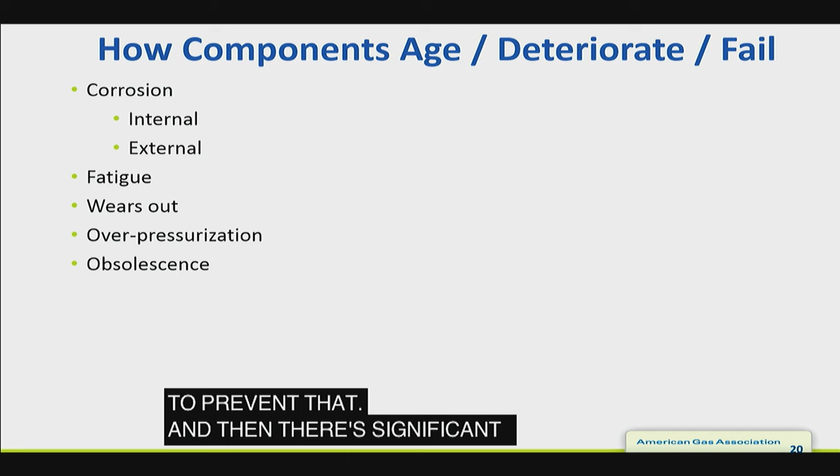And then there's obsolescence. A significant amount of what we deal with is obsolescence, but I would say most of the obsolescence is more aimed toward the instrumentation and electrical systems than major process equipment. But there's a lot of major manufacturers and equipment that was installed at a 1970 plant that aren't in business anymore. They've either been bought out, or there are non-OEM groups that help maintain parts and service for that equipment.

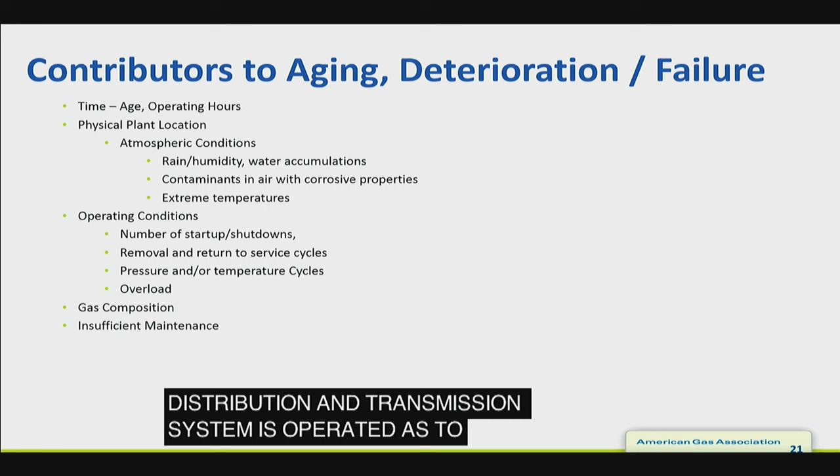As mentioned, there are some contributing factors to aging: the time, the age, the operating hours on the equipment. A lot of the peak shavers operate more than others. It's where you're at, how your distribution and transmission system is operated, as to how much that plant might vaporize. If you vaporize more in the winter, you're going to be liquefying more in the summer, so you're wearing out both sets of equipment. You may see increases there, so you want to keep an eye on that.

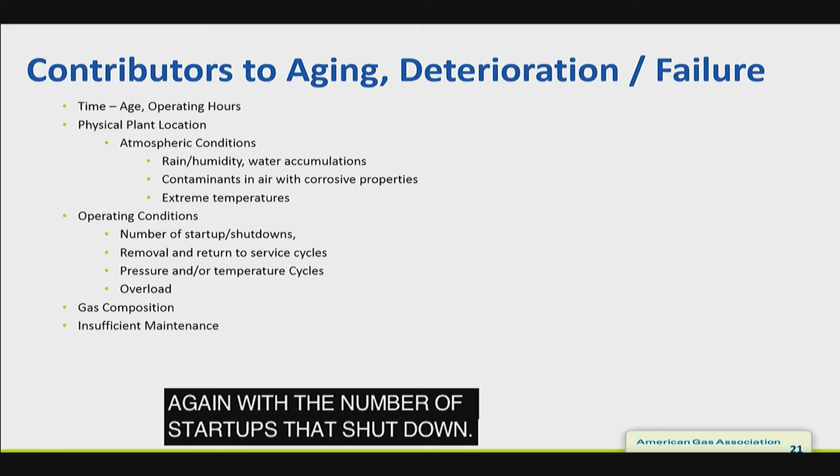There's atmospheric conditions that are impacted with rain, humidity, water accumulations, contaminants within the air, particularly if you're sited near or in locale of major thoroughfares. There's air contaminants that promote corrosion. Certainly if you're on the shoreline or along the waterways, there's salt water that might accelerate corrosion. And then there's certainly extreme temperatures. There's operating conditions, again, with a number of startups and shutdowns. The number of times the equipment has been removed and returned to service. Pressure and or temperature cycles all add to the aging. And then there's gas composition and insufficient maintenance.

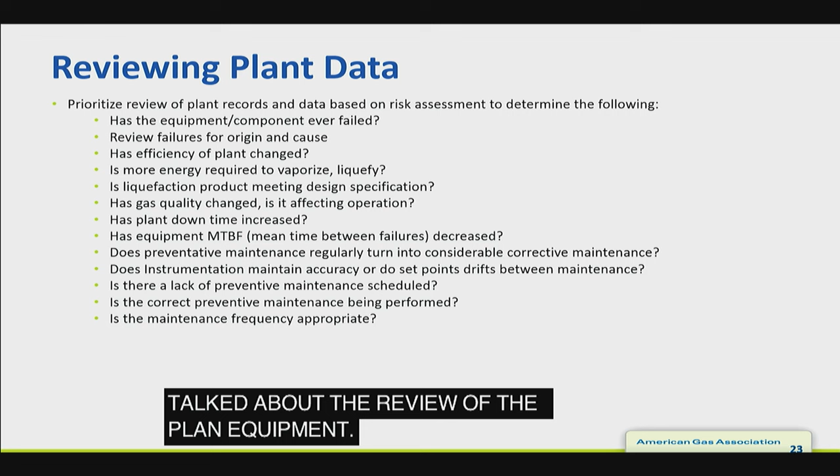Talked about the review of the plant equipment. We're looking for changes in efficiency, for downtime, for failures, and that might be our primary focus, is to address them initially. There's a prioritization process that can be employed, and that's based on that list of the equipment in the operating facility. And along with that is the ranking of that prioritization of all those pieces of equipment. And it's going to capture, are PMs assigned? Do you maintain spare parts? Are spare parts still available? And the list just goes on and on. Again, this is not an all-inclusive list, but just some jogging thoughts that might generate some additional questions as you go through.

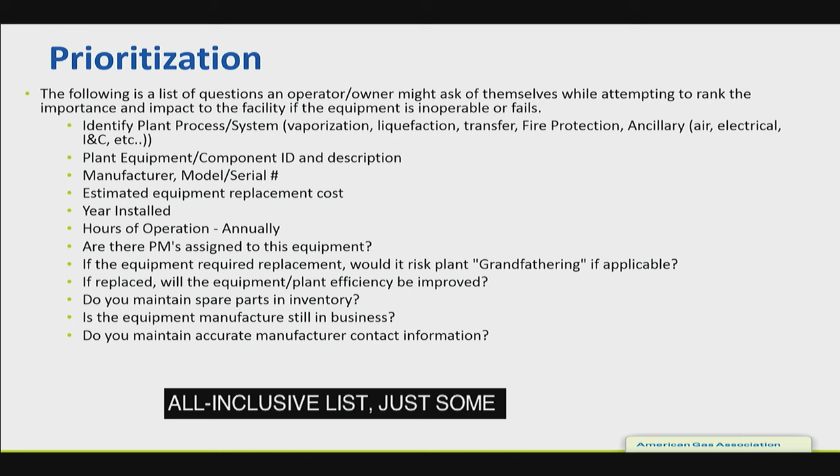The prioritization, after all that's compiled, is you apply your ranking system, you rationalize the results. Is it what you expected? Did you have the right ranking and the numbering system to make it work? Develop short-term and long-term mitigation plans that might include that list, which is also preparing specifications for replacement.

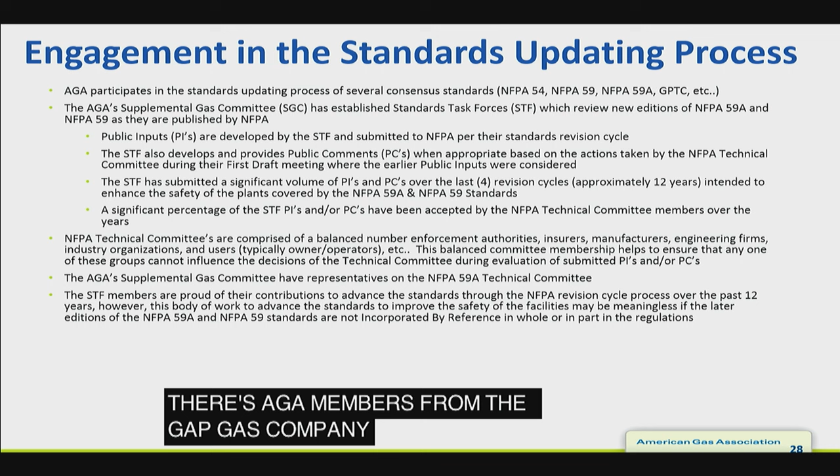As for our engagements in the standards updating process, AGA, as I mentioned, has been really involved in this. There's AGA members with the Supplemental Gas Committee that serve. Jay Jablonski, I believe, addressed the NFPA process, and it is a balanced process, and not any one group can take control of the team.

We've already spoken a number of times about the timeline for the regulations and what's incorporated. We have a 2001 edition currently, but there are multiple editions that have been published since then, each one being different levels of enhancement.

Some of the challenges managing under outdated regulations and consensus standards. The enforceable edition incorporates by reference a lot of the standards which themselves are outdated. Some enforceable editions also incorporate reference other standards which really aren't even any longer active. If you go to a newer edition and look for it, you won't find it. It's been superseded or replaced by another edition.

Just a couple quick examples of this are the safety factors for pressure vessels has been spoken about. LNG storage tanks, the whole coverage for construction, design, and engineering has been repackaged. 620 doesn't cover it all any longer in the new edition. It's a series that all has to be employed under API 625, 620, and ACI 376 now. And then a lot of NFPA standards for managing fire protection systems.

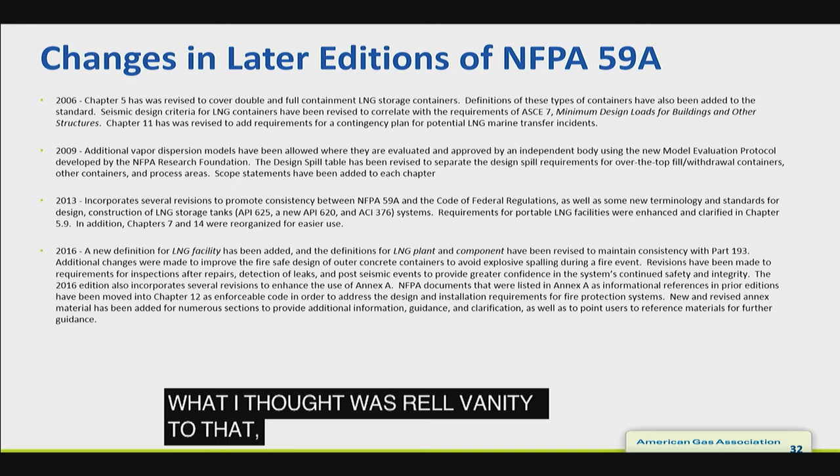So in summary, properly maintained, an LNG plant can be expected to have an excellent extended operational life. Obsolescence must be monitored, and an effective plant maintenance and replacement program can only be beneficial. Aging issues will continue to demand attention and action. LNG industry has an exemplary safety record. I'm proud of it. I believe all my members with AGA, the Supplemental Gas Committee, would support that statement.

The record is to the credit of the industry, the standards, the quality operation, the people that are operating the facilities, all the stakeholders, the public included, with the involvement we have. There are our emergency responders. We can't do it without their support. We try and support them as we go through the process.

And final here is the incorporation by later editions of 59A and also 59 as well are significantly outdated. I think updating those to more recent editions will help the industry. It'll help the regulators enforce a more appropriate and timely set of challenges. However, without updating to the later editions, the body of work that AGA is committed to and all the other technical committee members really is moot if we don't apply that body of work and the lessons learned we've learned over the last 10 to 15 years.

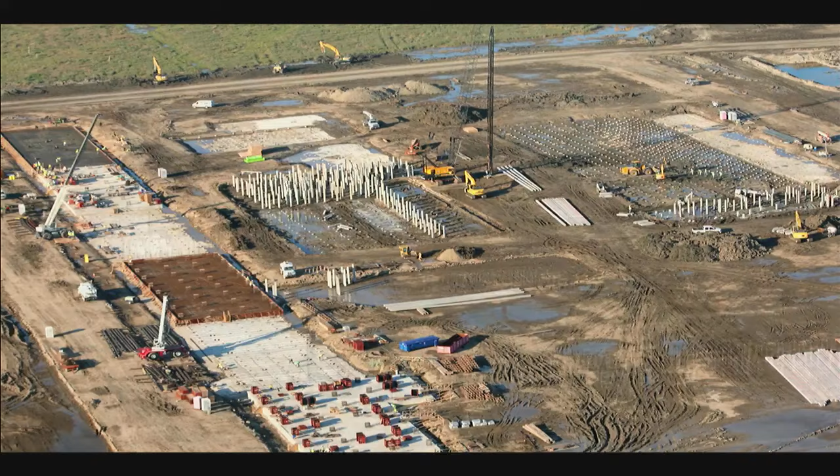This began our path to revolutionize the global energy market. This move was initially met with skepticism, but we forged ahead and were first in line to receive authorization from the FERC and DOE to be able to export domestic LNG, giving us first mover advantage by over 2 years. Because we not only survived but have thrived through this journey of change, we now have a facility which gives us a flexible platform for continued success.

Our employees have stood by us through this challenging journey. Our customers and stakeholders have shown remarkable confidence and commitment. Our investors not only brought capital, but enthusiasm and support so that the project would be successful. The local community leaders have enabled us to make a positive impact, both for the local economy and environment. Without the support of the local, state, and federal government, our project would not have made it off the drawing board.

U.S. LNG will forever impact the global energy markets and provides many benefits: energy security, supply diversity, flexibility, and further market liquidity. The facility you see today was possible because you supported our vision. The first export of domestically produced LNG would not have happened without your effort and commitment. Let's take a look at the historical moment when the first cargo with domestically produced LNG from the lower 48 was exported right here on February 24th.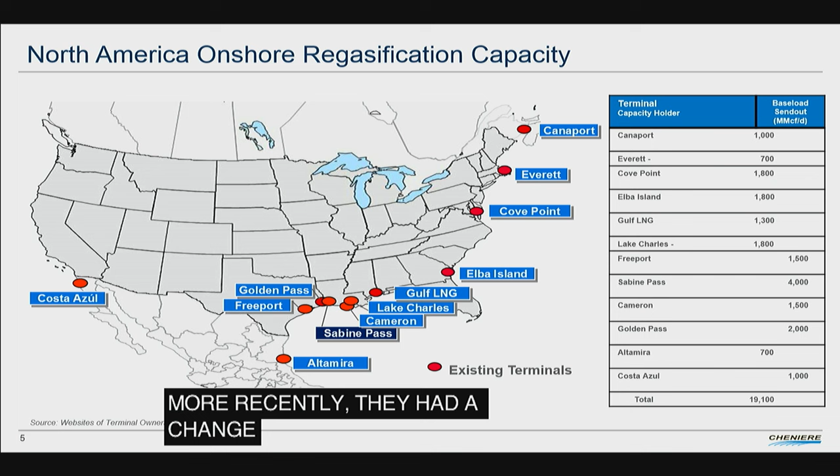More recently, though, you've had a step change to onshore regasification. In the early 2000s, we started building import terminals. This is a step change - these are $1 to $2 billion facilities, footprints of hundreds of acres, regas capacity of billions of cubic feet, and multiple storage tanks. So again, a step change in complexity.

So you have a ramp up here of the export capability out of the United States, going up to 65 million tons per annum, probably in the 2020 timeframe. These facilities are under construction and are progressing well. As a matter of fact, the United States will be one of the top 3 manufacturers of LNG in the world by 2020 - you have Australia, Qatar, and ourselves. Geopolitically, this is a huge step change in the world LNG market.

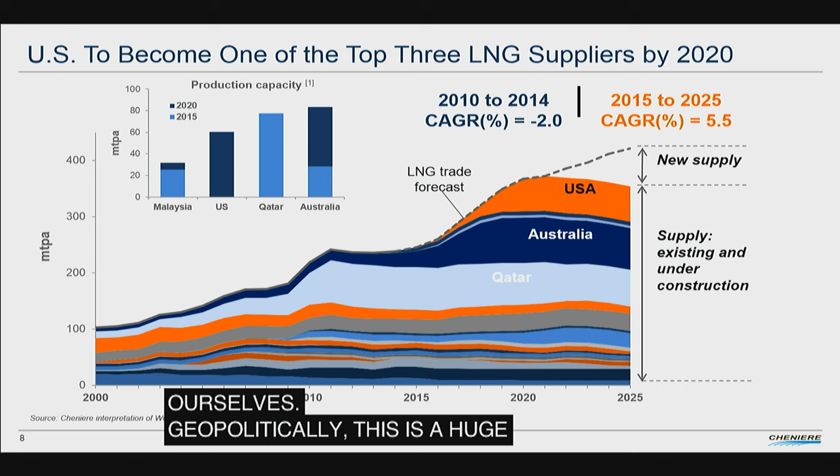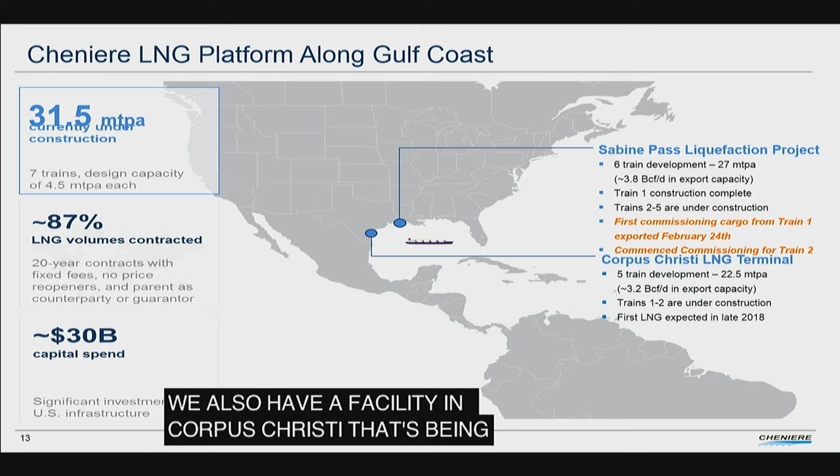You've seen the Sabine Pass facility. We also have a facility in Corpus Christi that's being built. Ultimately, 31.5 million tons per annum in the Cheniere facilities across 7 trains. 87% of that is contracted on a long-term 20-year basis. $30 billion of capital spend.

So this is a dense slide, but Cheniere statistics. The LNG tanks that we have on site are 160,000 cubic meters. They're roughly the size of the Astrodome. You can put a 737 inside these LNG tanks. There are 6 trains at Sabine equivalent to 27 million tons. Each train measures 1,300 feet in length, so they're 3 football fields.

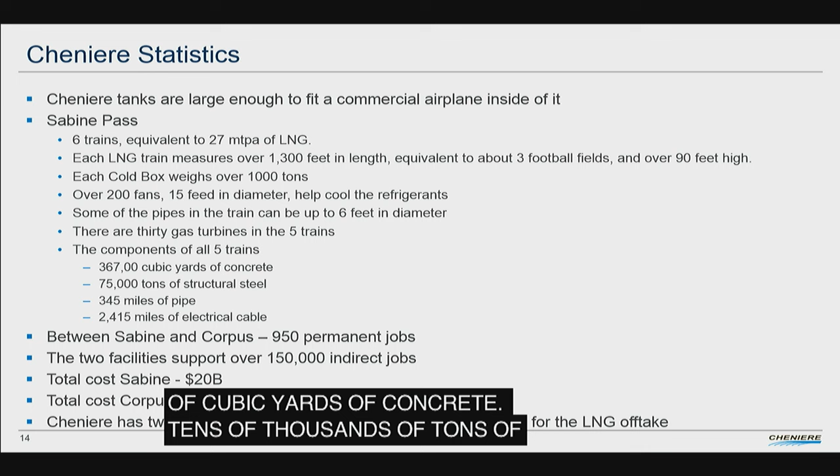There are over 30 gas turbines in the 5 trains at Sabine. You have hundreds of thousands of cubic yards of concrete, tens of thousands of tons of structural steel, hundreds of miles of pipe, thousands of miles of electrical cable. Between Sabine and Corpus Christi, you have 950 permanent jobs, 150,000 indirect jobs. Cost at Sabine, $20 billion. Cost at Corpus, $10 billion.

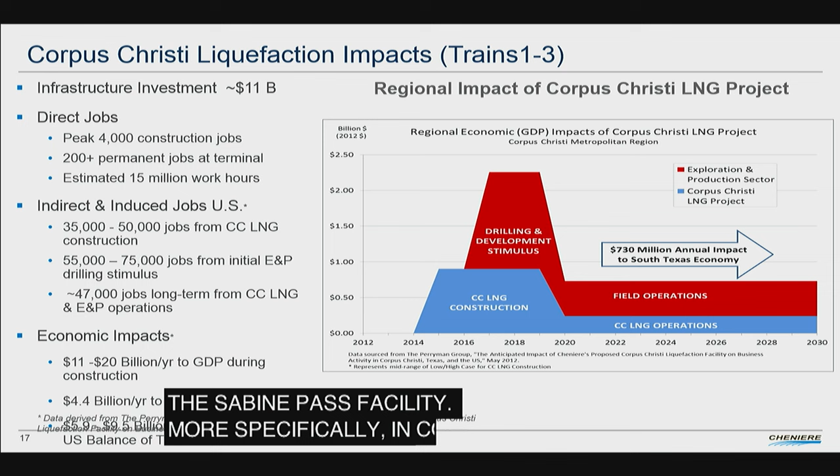But we also have local impacts, positive impacts, $2.3 billion bought from 54 manufacturers in 17 states for the Sabine Pass facility. More specifically in Corpus Christi, our econometric study showed $2 billion of positive impacts in the area, in the region, during construction, and $700 million of positive impacts during the life of the facility.

Again, we're a heavily regulated industry, oversight by multiple agencies, local, state, and federal. Some of that is overlapping jurisdiction. But it's not just regulators overseeing these facilities. You also have multiple layers of review. You have our constructing contractor, Bechtel, who has a fleet of engineers, but you also have our engineers overviewing their engineers to assure that the facility is designed and constructed safely.

Externally, you have a fleet of engineers that looks at this facility as well. You have the lenders who want to make sure that as they lend us money that they're getting value for their money. Customers, again, they have to have assurance that we're going to be able to provide LNG to them, and the insurers. So these are very well-reviewed facilities.

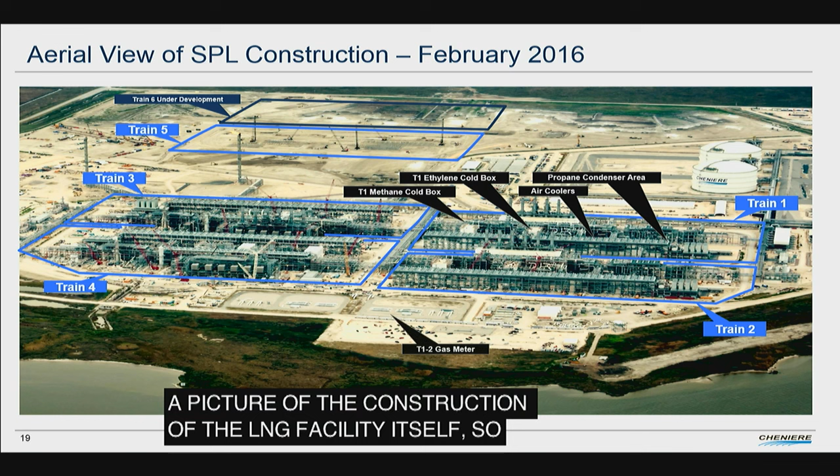You saw the video. This is a picture of the construction of the LNG facility itself. So the 4 trains, 5 trains that are currently under construction. Train 1 is commissioned. Train 2 is in commissioning, so that will come online here shortly. Train 3, 4, and 5 are under construction.

And this is the Corpus Christi facility. We have 2 trains, 2 tanks, and 1 berth under construction there. Another tank and another train and another berth is permitted. And then we have 2 trains and 1 tank that is in the permitting process.

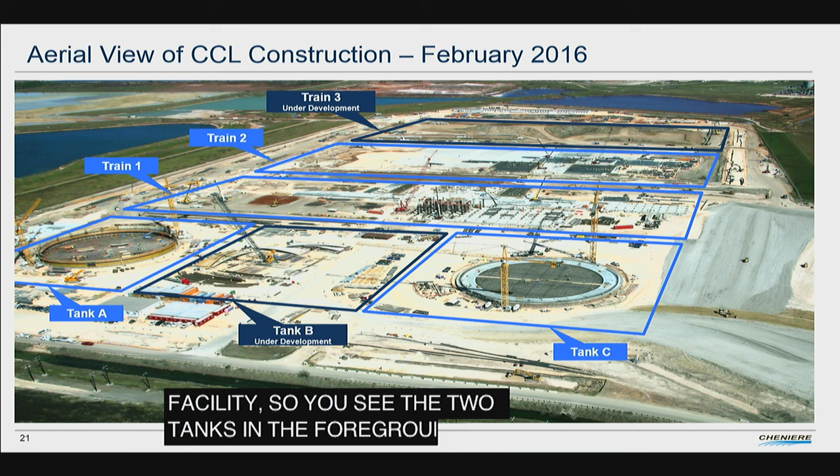And this is a construction photo from that facility, earlier in construction than the Sabine facility. So you see the 2 LNG tanks in the foreground that are being constructed, and the LNG trains, train 1 and 2. So this is a little bit of a dense slide.

Let's go to the regulations and standards. Again, you've heard that there are 3 major standards that we work under: 49 CFR Part 193, 33 CFR Part 127 for the marine facilities, and NFPA 59A. There are a significant number of reference standards in those standards and regulations. So 49 CFR Part 193 shows 9 reference standards, and 59A shows 61 reference standards.

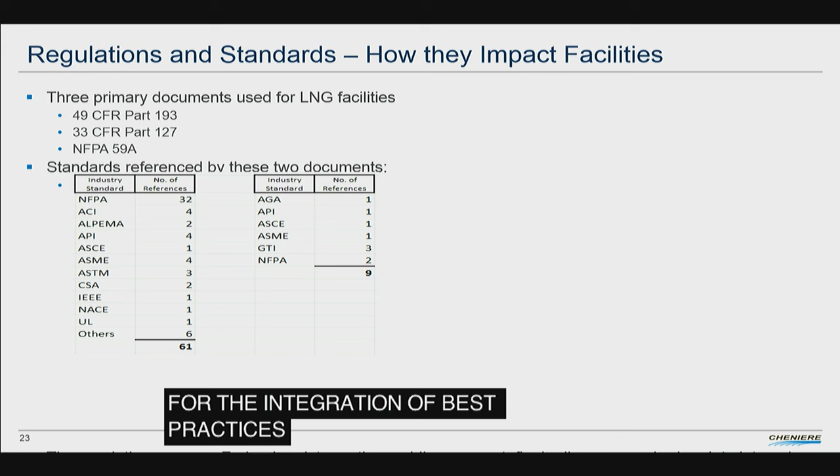That regulatory process and the standards are similar in that both allow for public comment. A little bit different in that the regulations publish in the Federal Register and ask for public comment. NFPA 59A, as you heard Jay say, you can comment on that for a whole year's period, and the committee will try to take a look at those comments and evaluate them and put them into the standard as available. But the big difference is that standards are updated usually on a set schedule, and that is important because it allows for the integration of best practices, technological advancements, and lessons learned. And so that standards process is very important.

The regulations don't necessarily have an interval, and this workshop is really very important in identifying that we need some update in the regulations. That delay in updating the regulations or standards really delays integration of improvements in process technology, and that can increase risk, which we don't want to have happen.

So the issues we identified working in the industry over the past 15 years with these standards is that these older versions can negatively impact all three areas: design, construction, and operation, and can cause delays and increased costs.

The design issue—we've mentioned the 1992 version of ASME that's identified in the 2001 version of NFPA 59A. That required us to provide additional information to the regulators, which caused delays. That's unfortunate because that version actually was in error; it should have been a newer version identified in 59A.

But we've worked through that with the regulators, and there is the opportunity to do that, as variances are allowed to the prescriptive standards, but you have to provide justification for those variances.

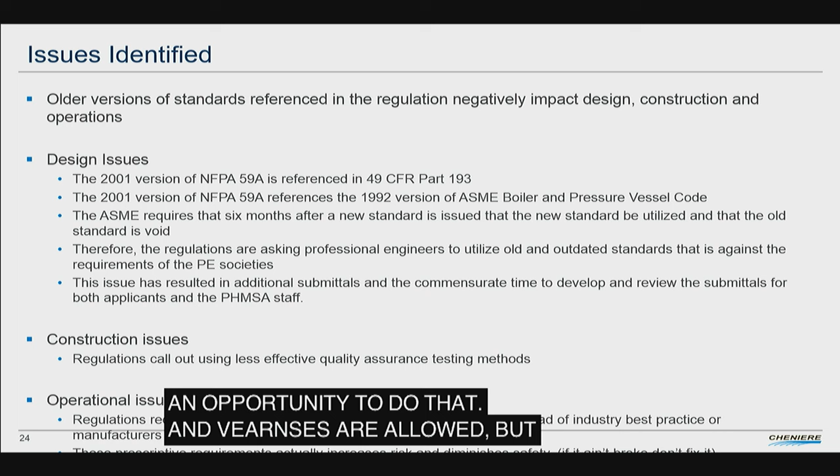On the construction issue, regulations actually call out a less effective quality assurance testing method, and again we've provided information and gotten a variance from that.

On operational issues, the regulations require prescriptive testing intervals for certain equipment instead of industry best practice or manufacturers' recommendations. These prescriptive requirements actually increase risk and diminish safety, in that if it ain't broke, you don't want to go in and fix it in these particular instances.

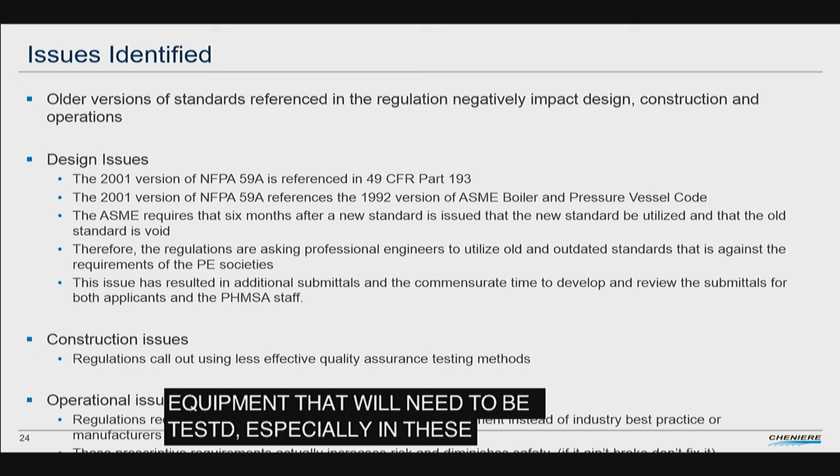The other thing we're seeing is that the number of pieces of equipment that will need to be tested, especially in these world-scale liquefaction facilities compared to peak shavers, is going to be exponentially larger—we believe onerous and potentially unmanageable. So here are my conclusions.

The LNG industry has evolved both in the United States and worldwide—a much smaller industry at one point, but now becoming, with larger facilities, a larger and more complex business model. The regulations, although dated, have served the industry very well. We have a 50-year safety record that shows very few instances in the United States.

The U.S. regulations, however, don't reflect industry best practice in certain instances and actually increase risk in the design, construction, and operation stage of the facilities.

We believe a good first step is to update with the most current standards and regulations. This shouldn't be controversial and should be able to be done quickly. The committees have done a lot of work to make sure those standards are in good shape and reflect industry best practices. Ultimately, we believe LNG regulation should reflect industry best practice and a risk-based approach.

OSHA PSM is one regulation that's been out there since 1990. We feel like that is a good example—it's been vetted by quite a few years of use in other industries, specifically refineries in the United States. We believe OSHA PSM is a good option for a path forward. Those are my remarks. Thank you very much.